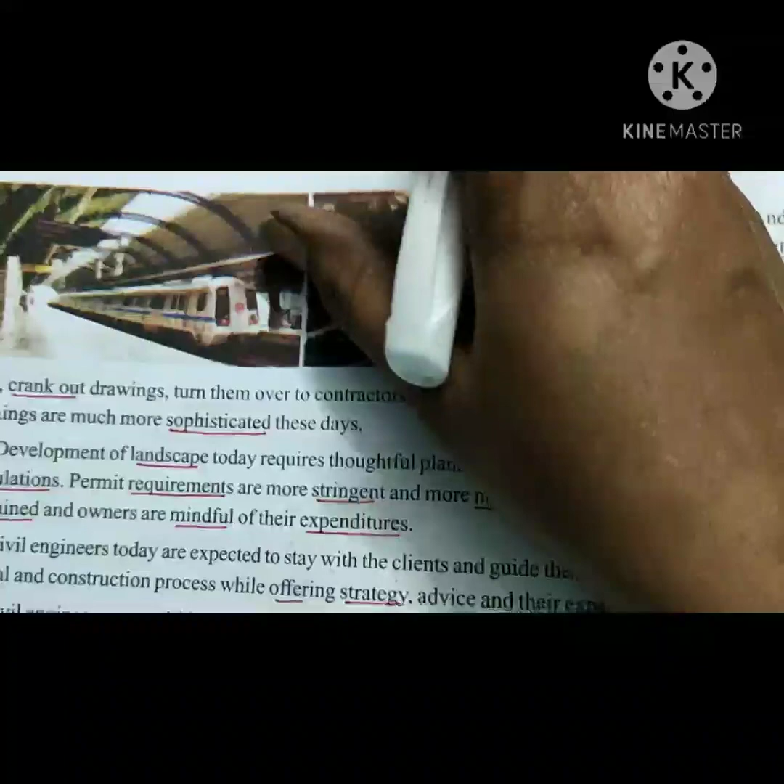The role of civil engineering has been continuously changing. Earlier, engineers would focus their efforts on production of site plans, crank out drawings, turn them over to contractors and pretty much be done with it. But things are much more sophisticated these days.

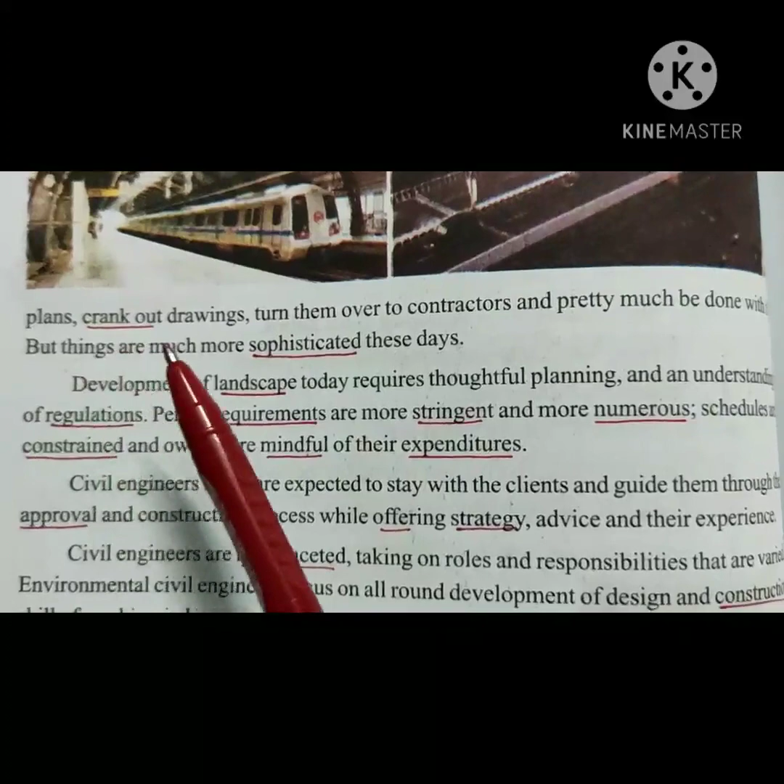In previous days, civil engineers used to draw the plans, crank out - meaning produce a lot of low quality things quickly - drawings, and turn them over to contractors, pretty much being done with it. But things are much more sophisticated these days. Meaning of sophisticated: advanced and complicated in the way they work.

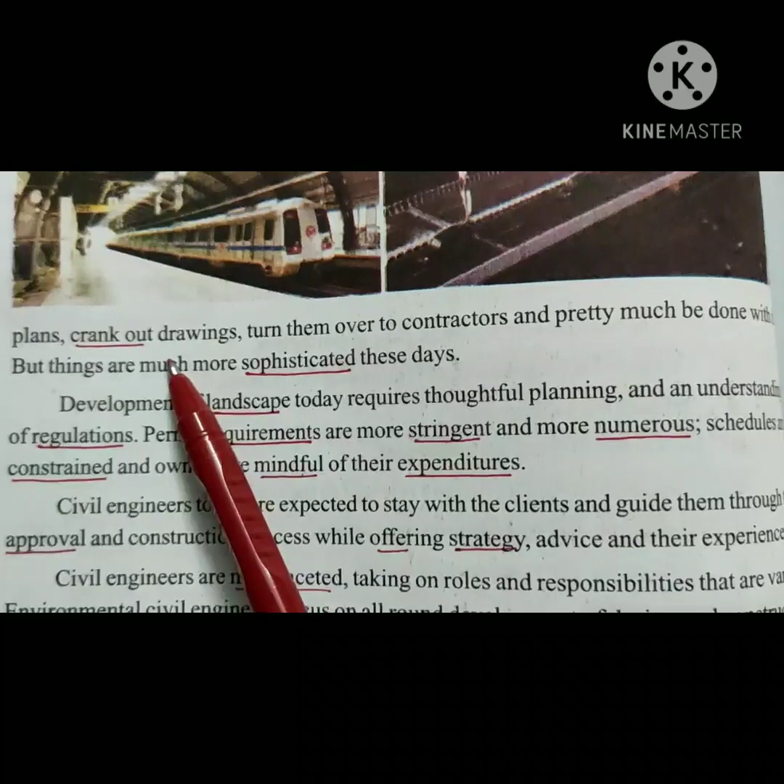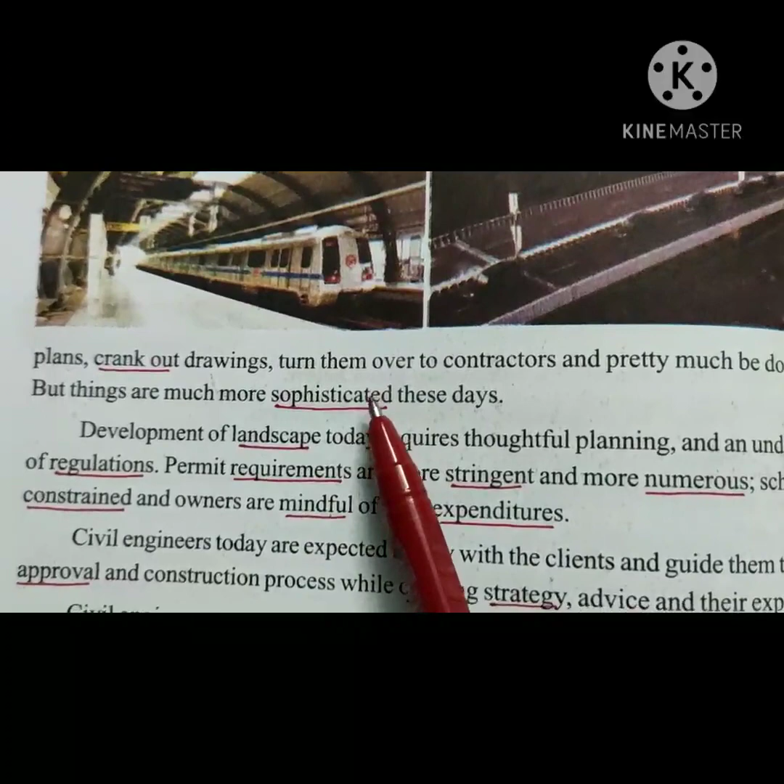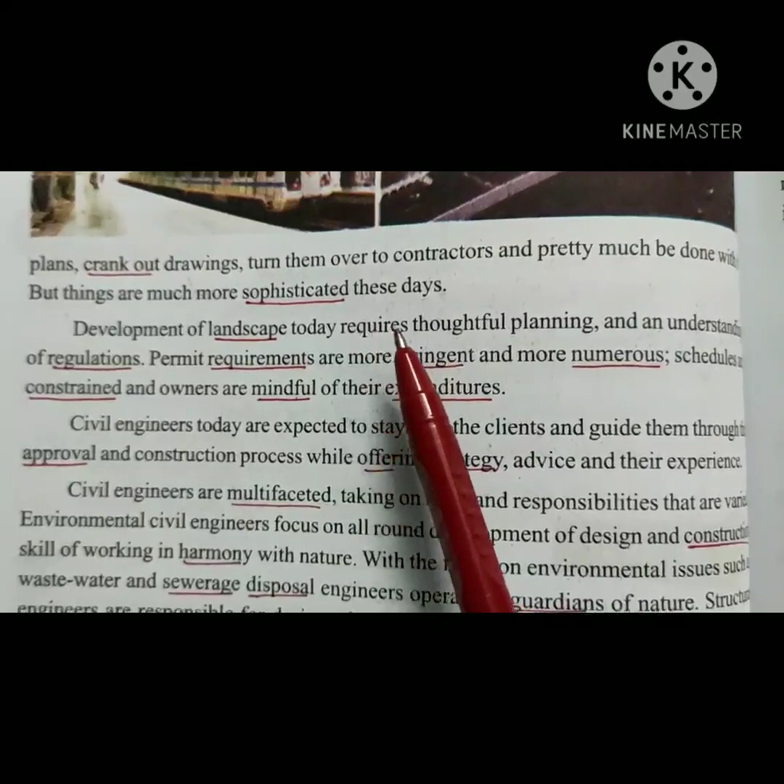Previously they used to draw the plans, give them to the contractors, and get materials from outside - many such plans used to take place. But now, much more sophisticated, advanced technology is used to complete their work very easily these days. Development of landscape today requires thoughtful planning and an understanding of regulations.

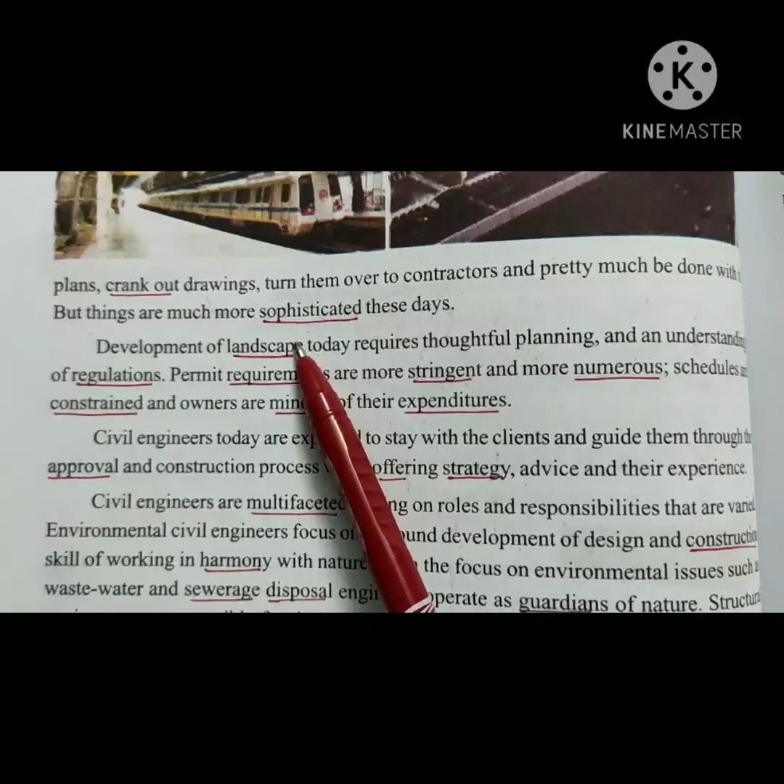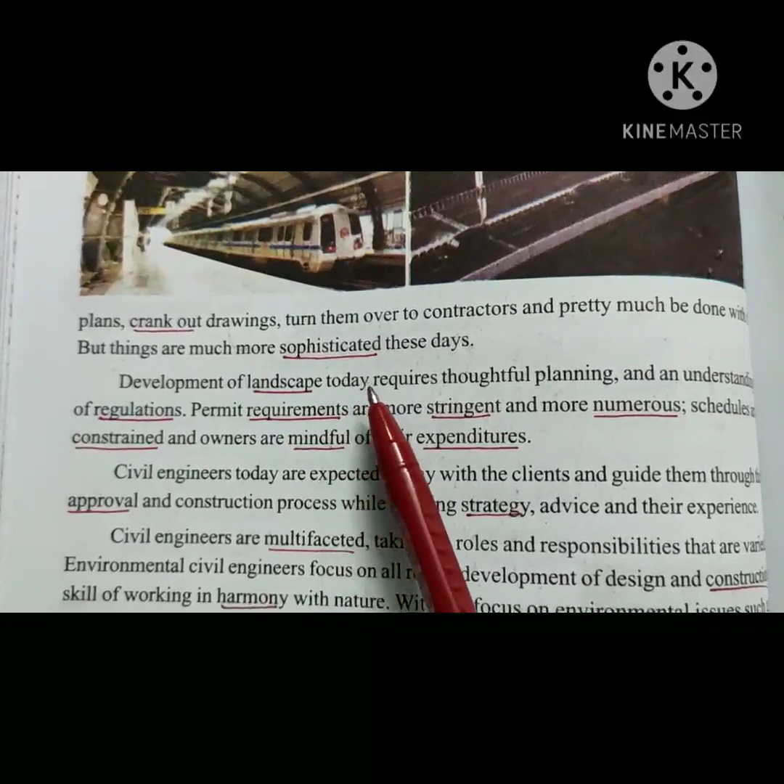Meaning of landscape: everything you can see in an area when you look at it - the whole picture of whatever construction is needed there. The development of landscape today requires thoughtful planning and an understanding of regulations, meaning rules and regulations should be maintained properly, along with thoughtful planning and understanding.

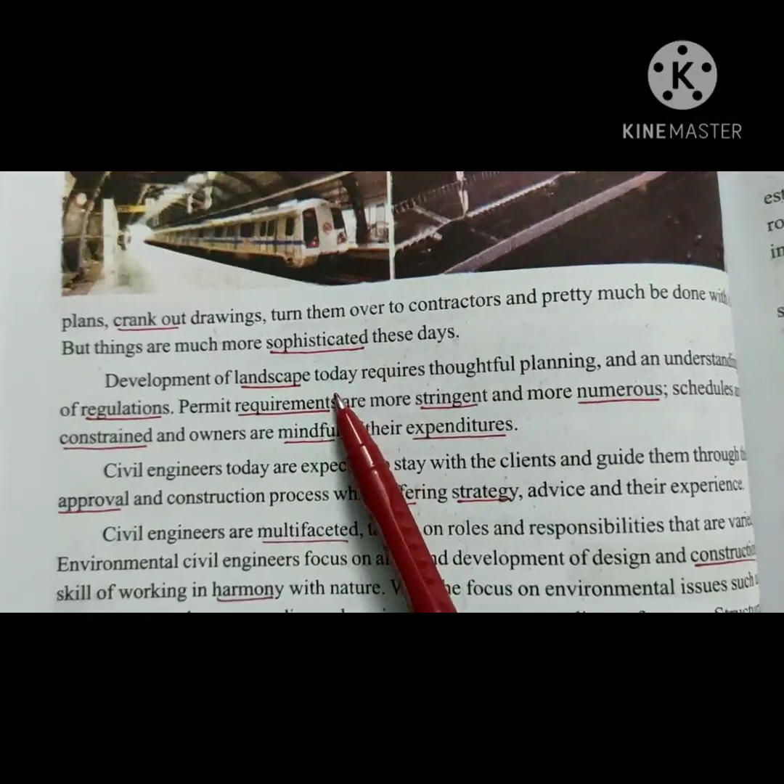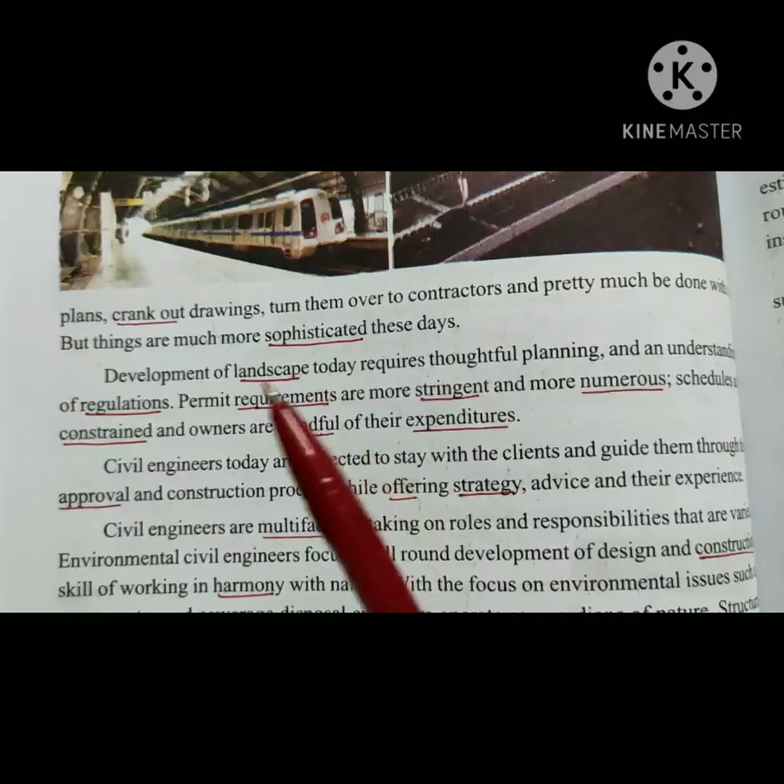Permit requirements are more stringent and more numerous. Schedules are constrained and owners are mindful of their expenditures. Meaning of requirements: needs; stringent: strict; numerous: many. So here, permit needs are very strictly maintained.

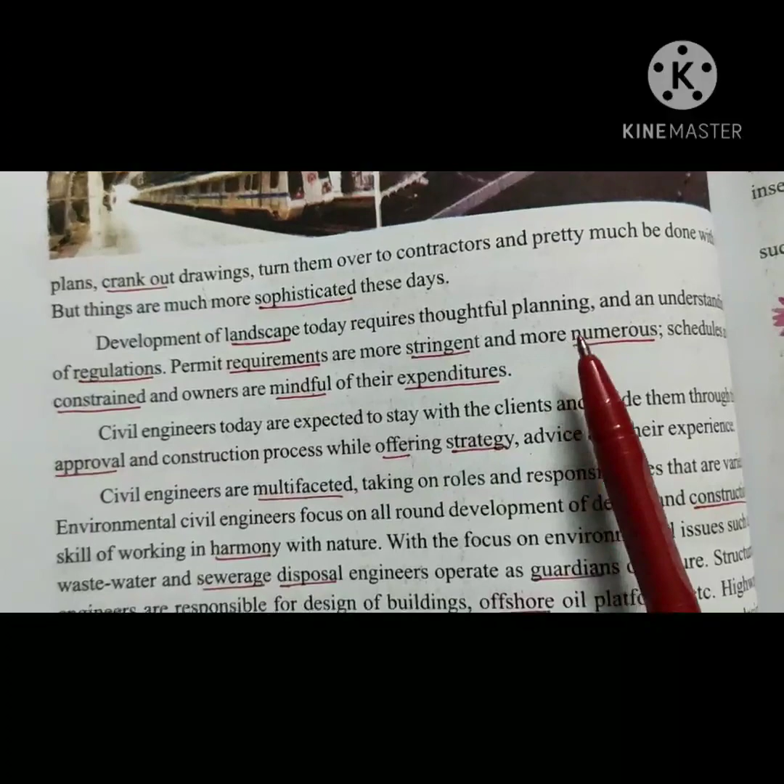Schedules are constrained, meaning a thing that limits something - there should be a limit. Owners are mindful, meaning aware of, their expenditures, meaning expenses about money. The owners are very aware of the expenditures because day by day expenditures are increasing a lot. So permit needs are strict, many rules must be maintained, and owners are also aware of each and every expenditure.

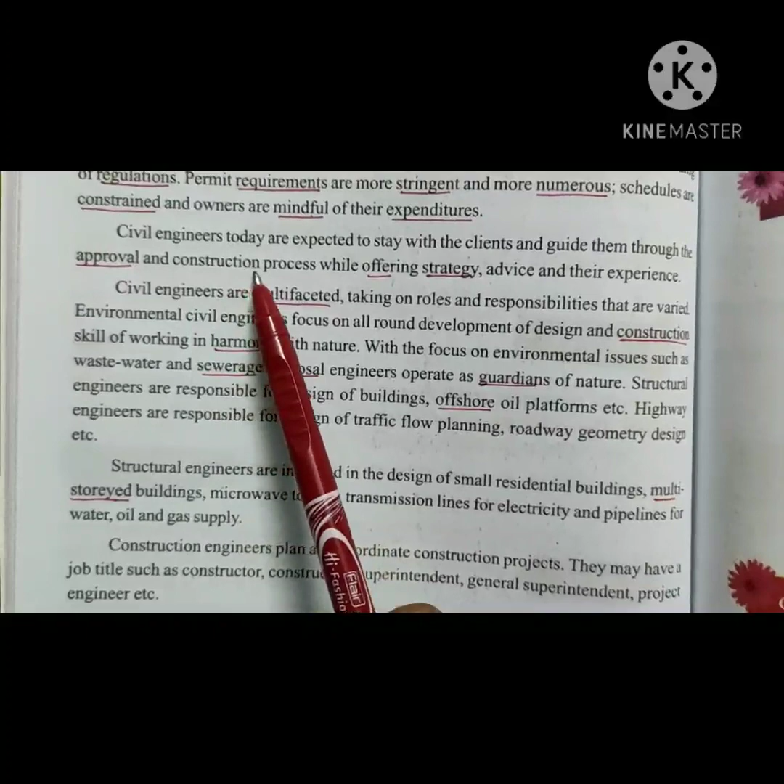Civil engineers today are expected to stay with the clients and guide them through the approval and construction process while offering strategy, advice, and their experience.

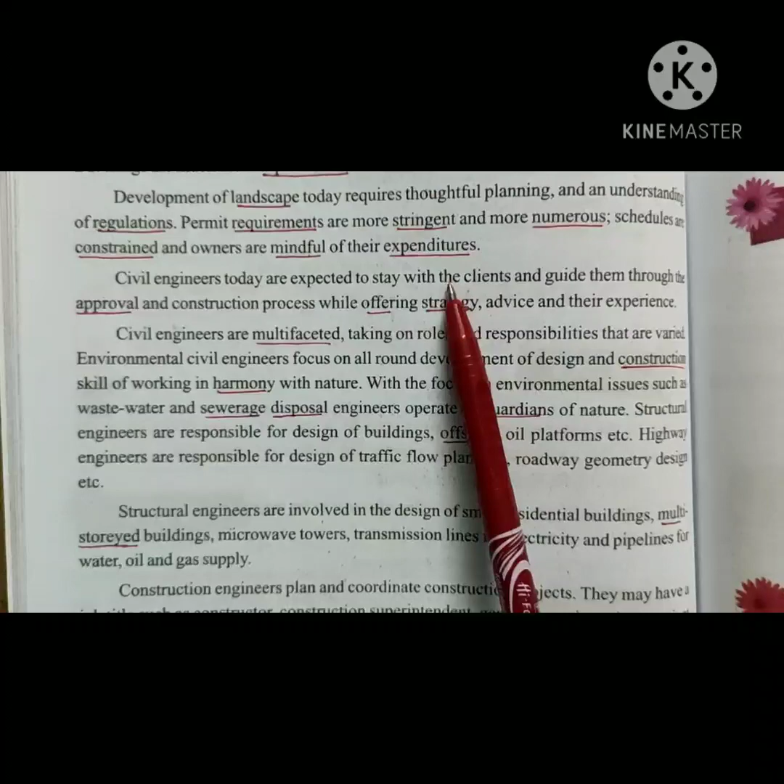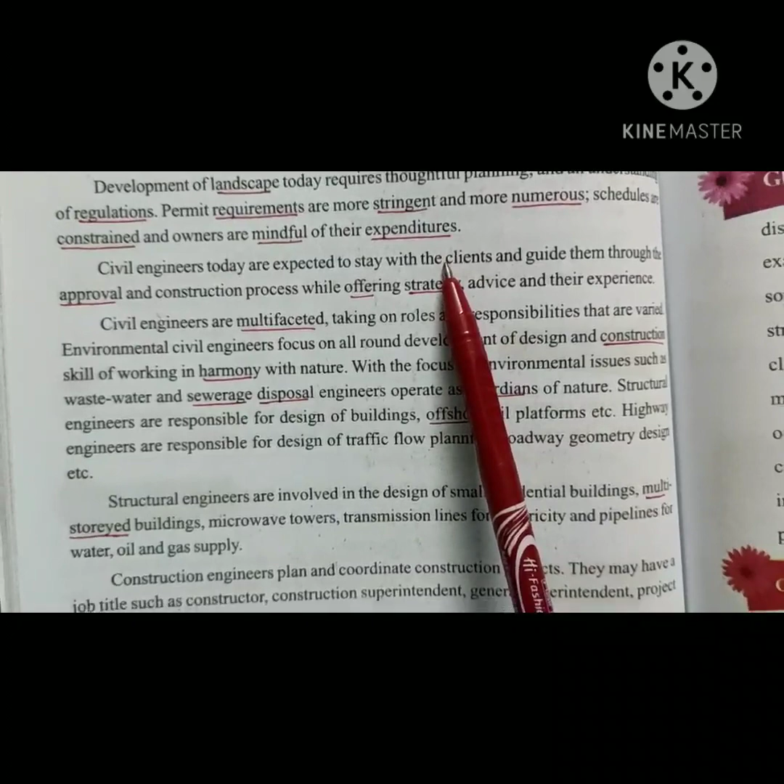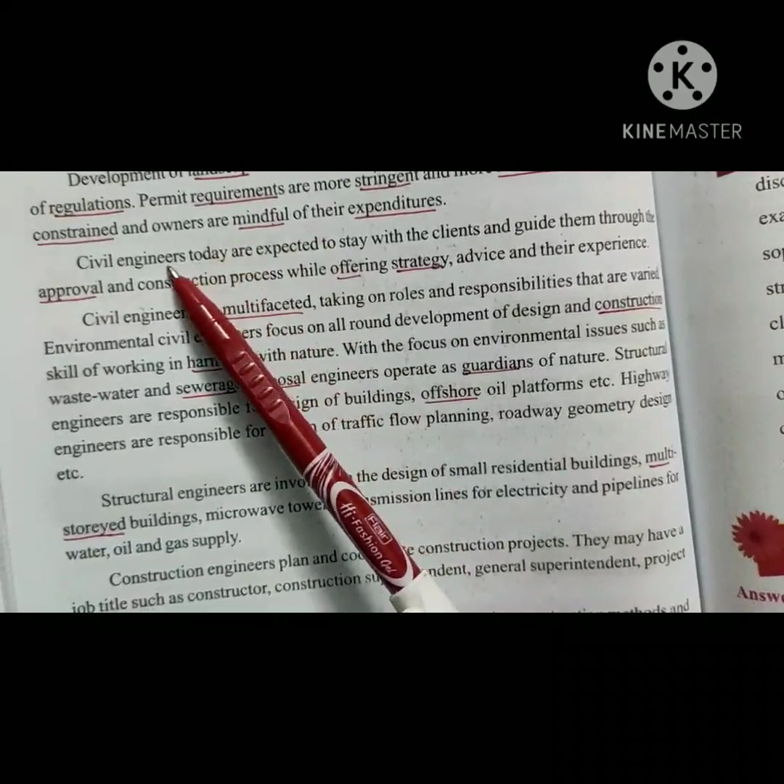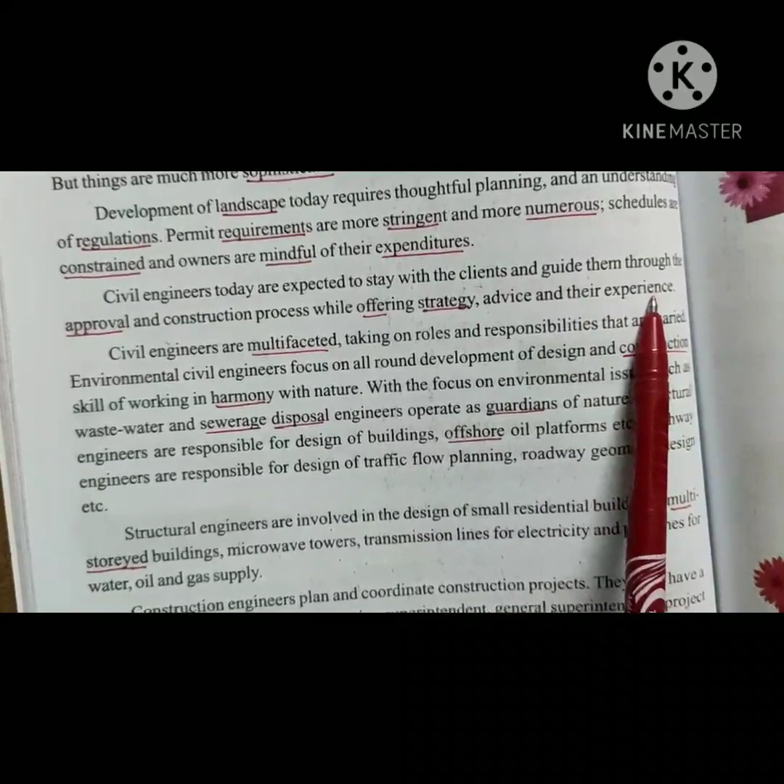Clients means those who ever need the help of civil engineers. They approach civil engineers when they want to know about building a house, and they would like to be guided with approval, meaning permission. They want to take permission, know about the construction process, and get help from civil engineering strategy, meaning technique. So the clients need the help and advice with the civil engineer's experience to guide them throughout the construction process. They would like to take permission and ask the civil engineers to help them.

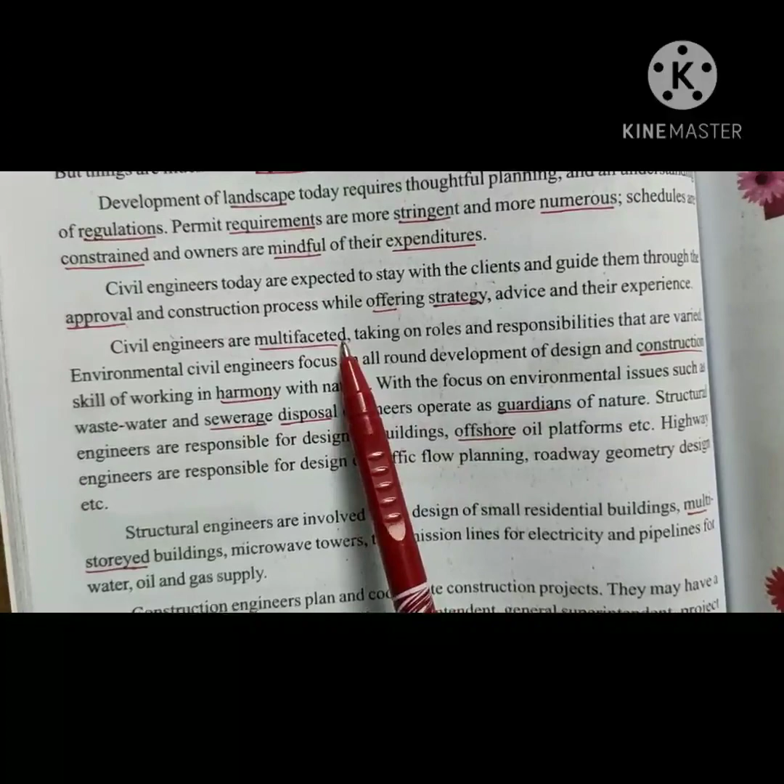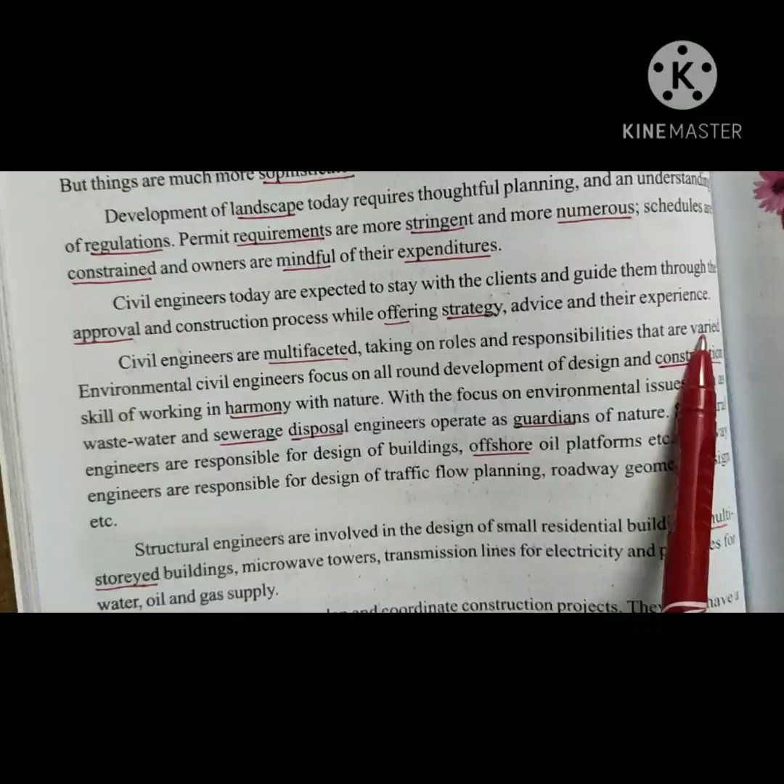Civil engineers are multifaceted, taking on roles and responsibilities that are varied. Multifaceted means having many phases or branches. Civil engineering consists of so many branches, and each branch has its own role and responsibility.

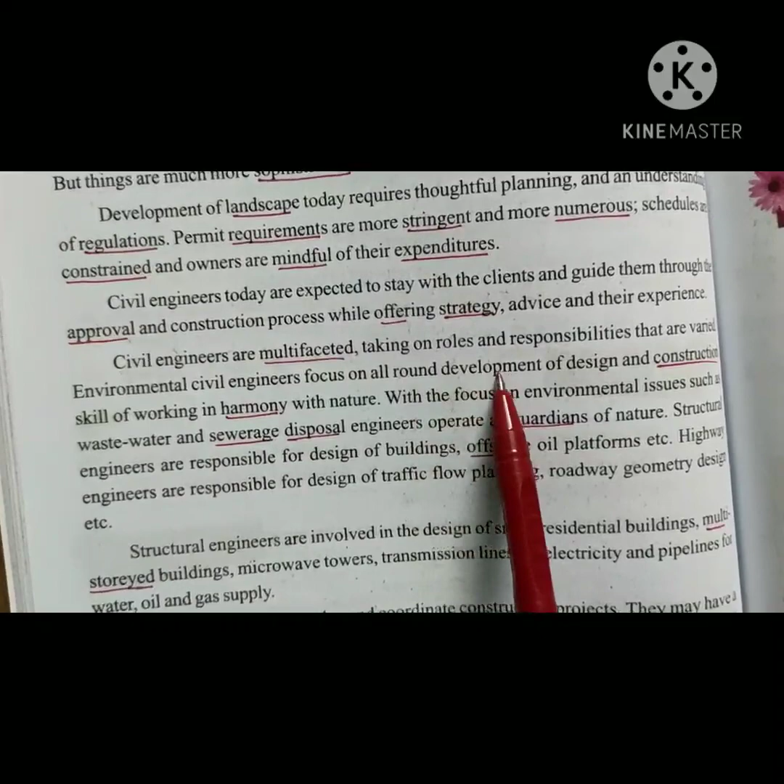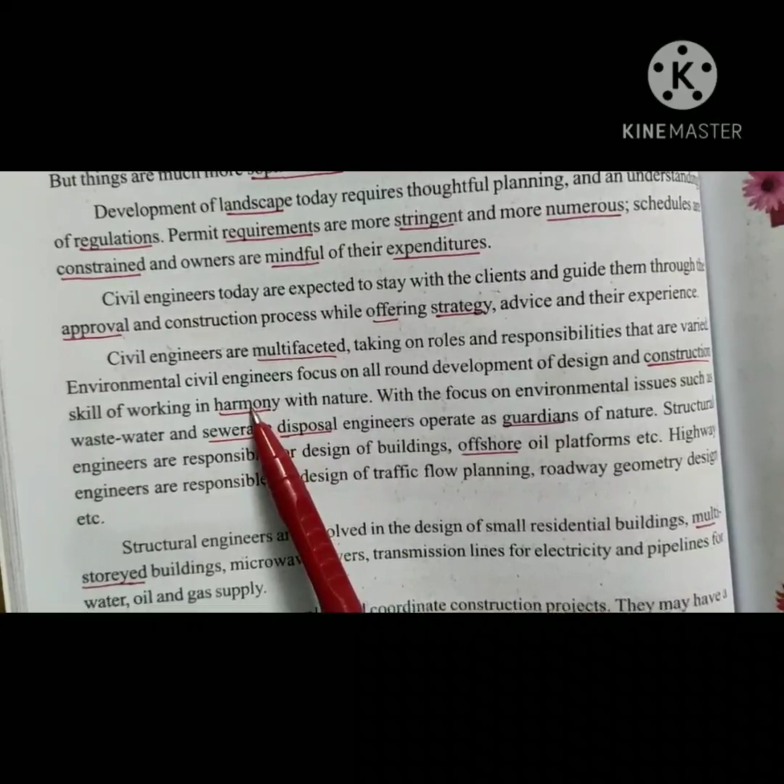Environmental civil engineers focus on all-round development of design and construction, the skill of working in harmony with nature. This is one branch of civil engineering. They focus on all-round design and construction, balancing with nature, meaning all their construction and building work is done in harmony, in balance with nature.

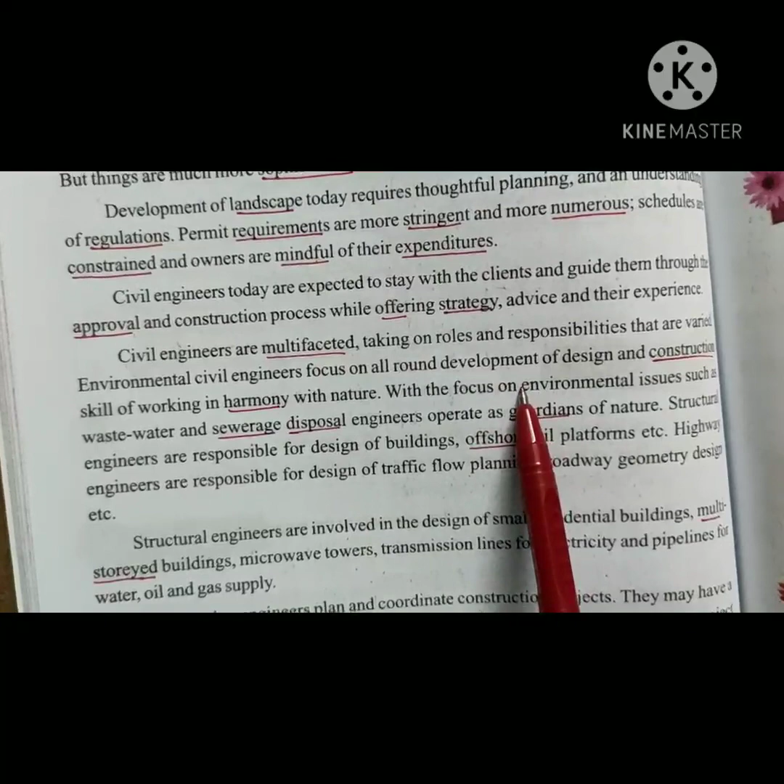With the focus on environmental issues such as wastewater and sewerage disposal, engineers operate as guardians of nature. Sewerage means the system that carries the wastage produced by human beings, and disposal means to throw away. The engineers dispose of this waste and operate as guardians of nature.

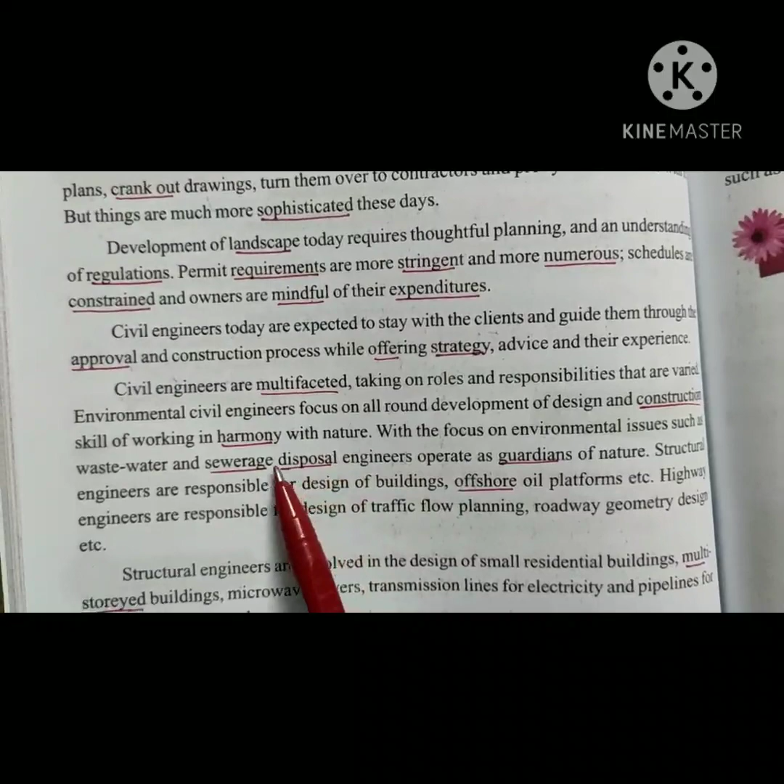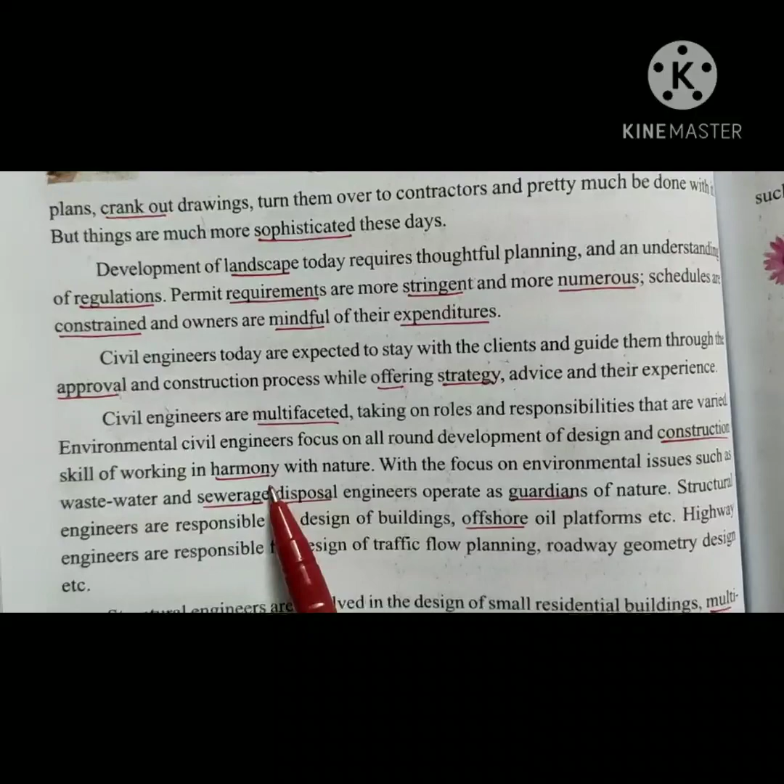Environmental engineers are called the guardians of nature. Who are the guardians? The waste material which is thrown by us, they dispose of it, meaning they throw it away. They are the guardians of our nature. Why are they called guardians of our nature, children? Because they guard our nature - whatever wastage we throw out, they throw away from us and protect the nature.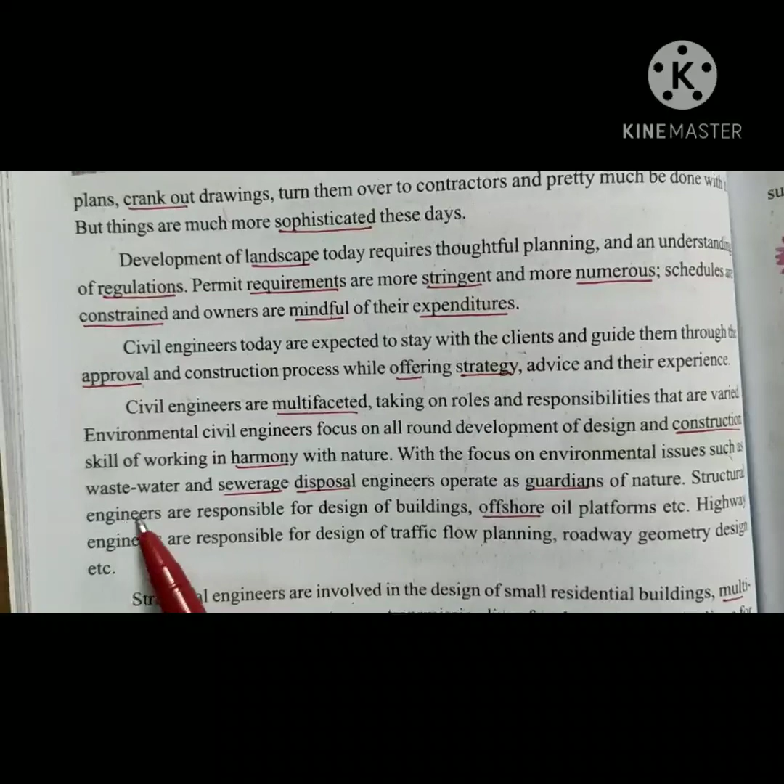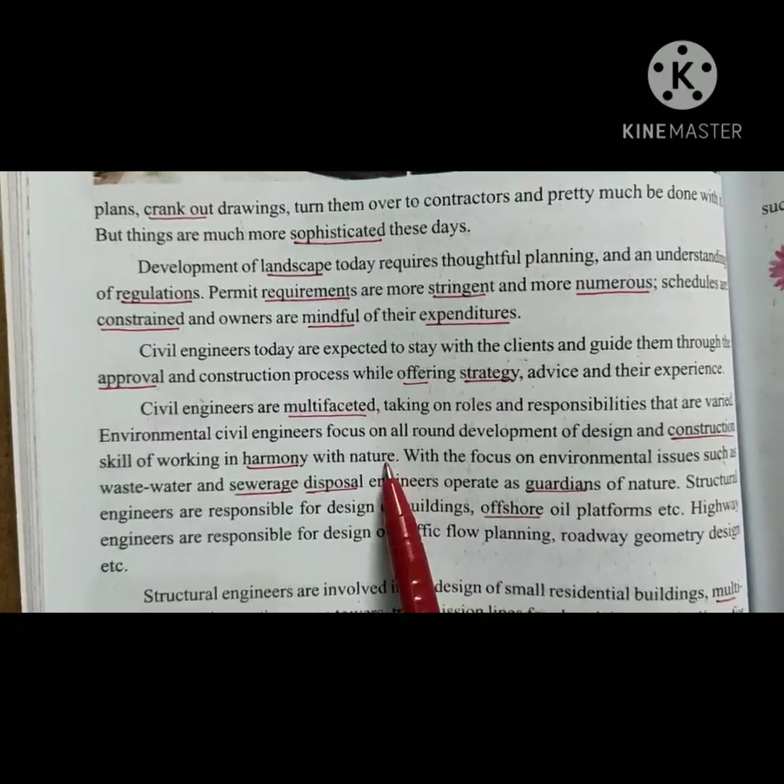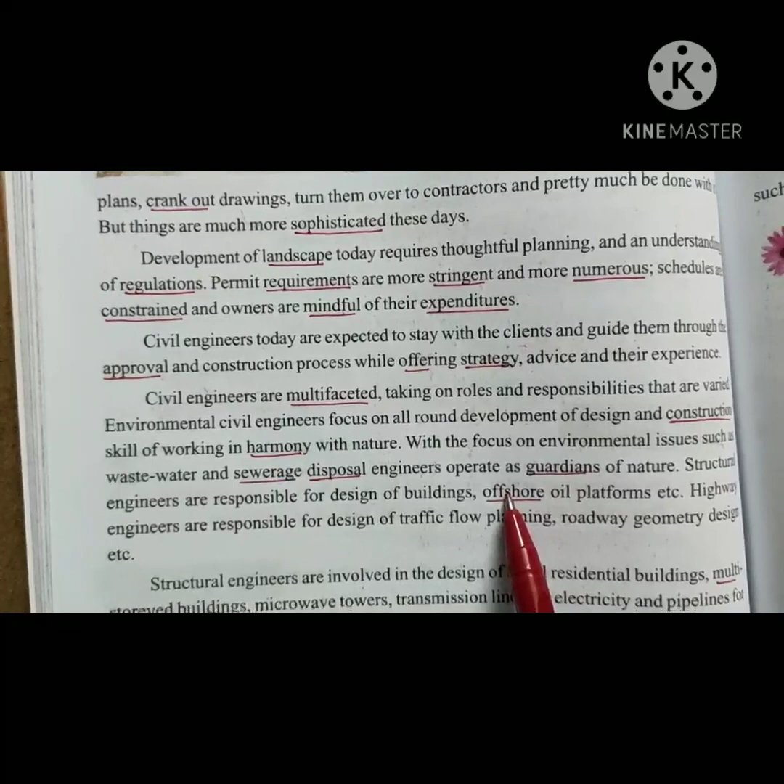Structural engineers are responsible for design of buildings, offshore oil platforms, etc. In civil engineering, one branch is environmental civil engineers who focus on harmony with nature and guard it. Coming to structural engineers, they are responsible for design of buildings, offshore meaning at a distance from the seashore, oil platforms, etc. They handle construction near the offshore area.

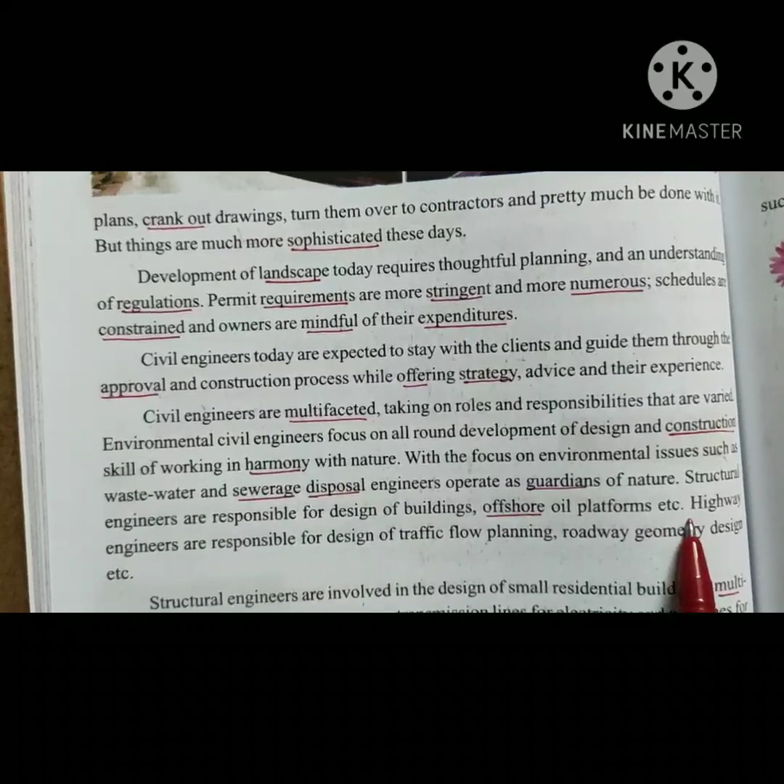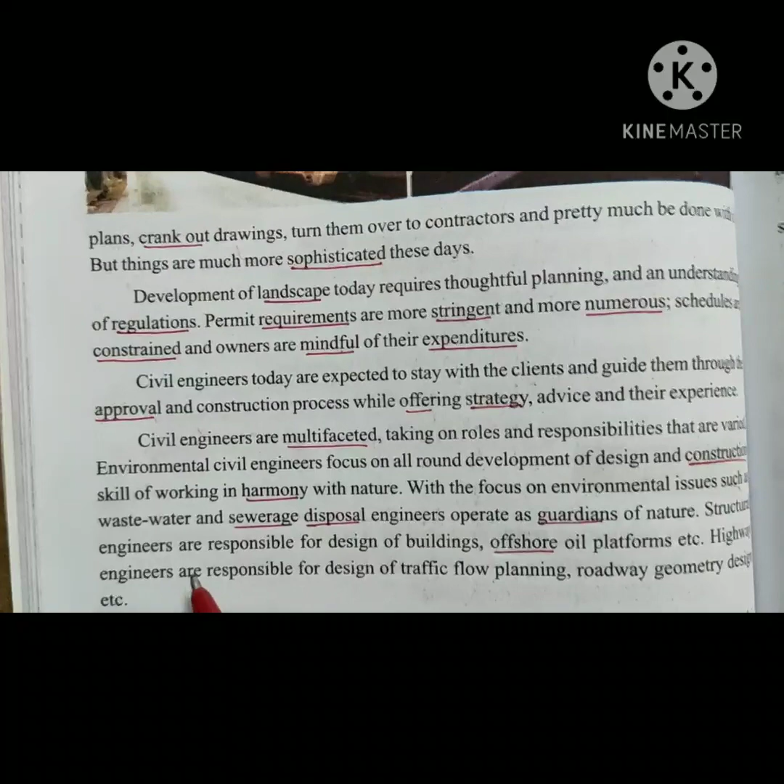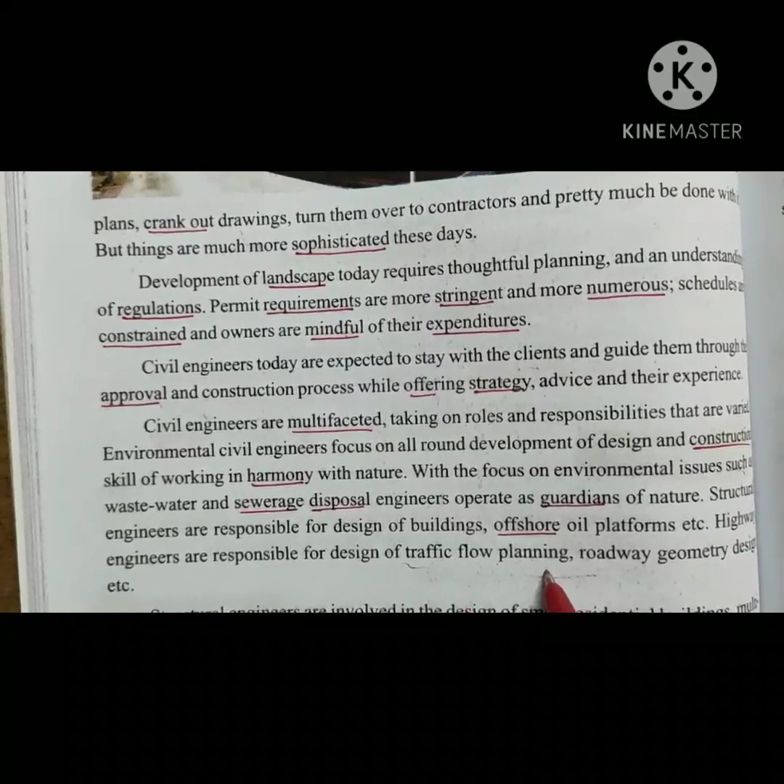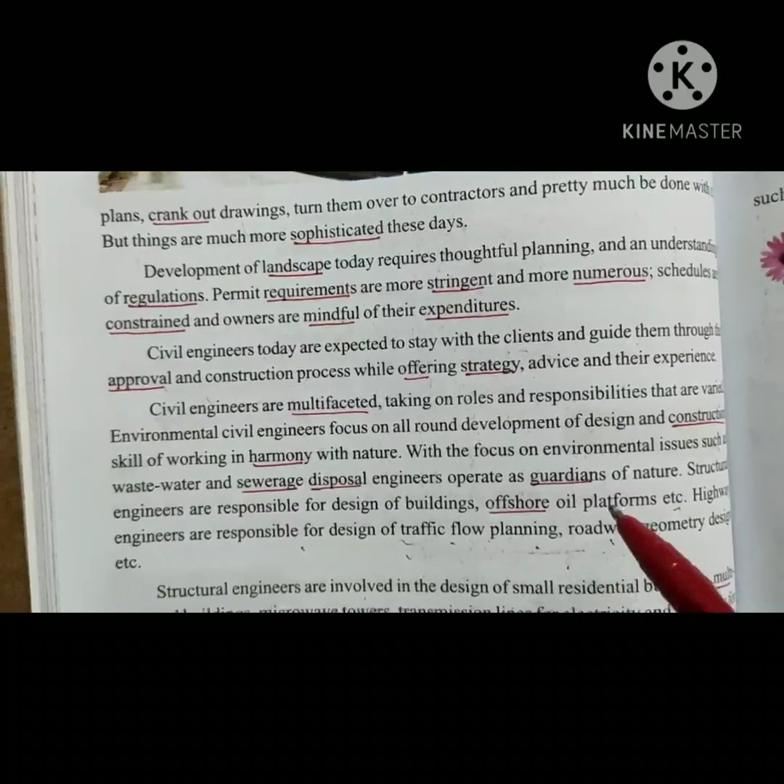Highway engineers are responsible for design of traffic flow planning, roadway geometry designs, etc. They are responsible for the design of traffic flow planning - you can see how traffic flows smoothly on the roads because highway engineers are fully responsible for this. According to the design of traffic, we are able to go easily and safely on the roads. So they are the engineers for traffic flow planning, roadway geometric designs, etc.

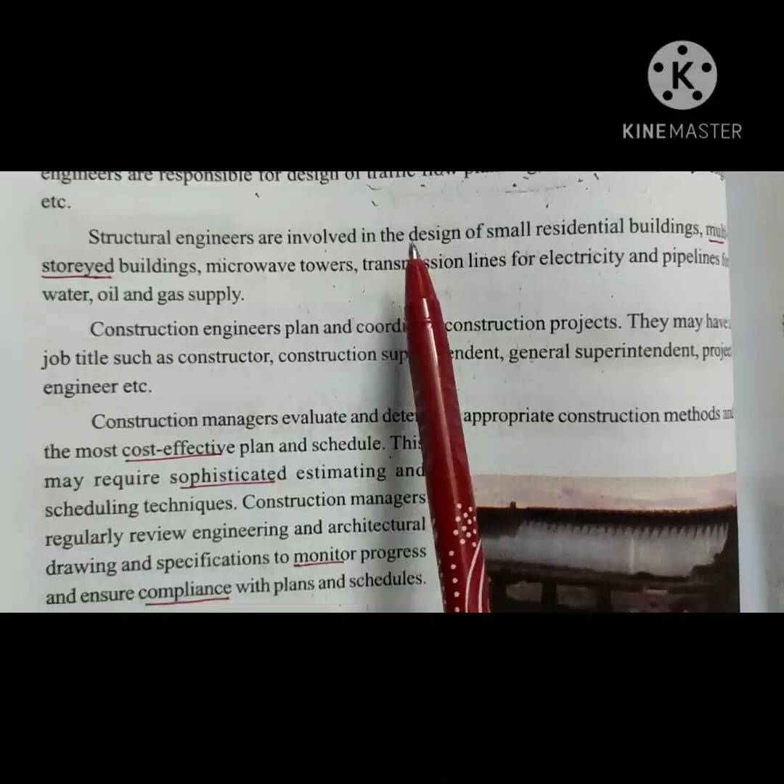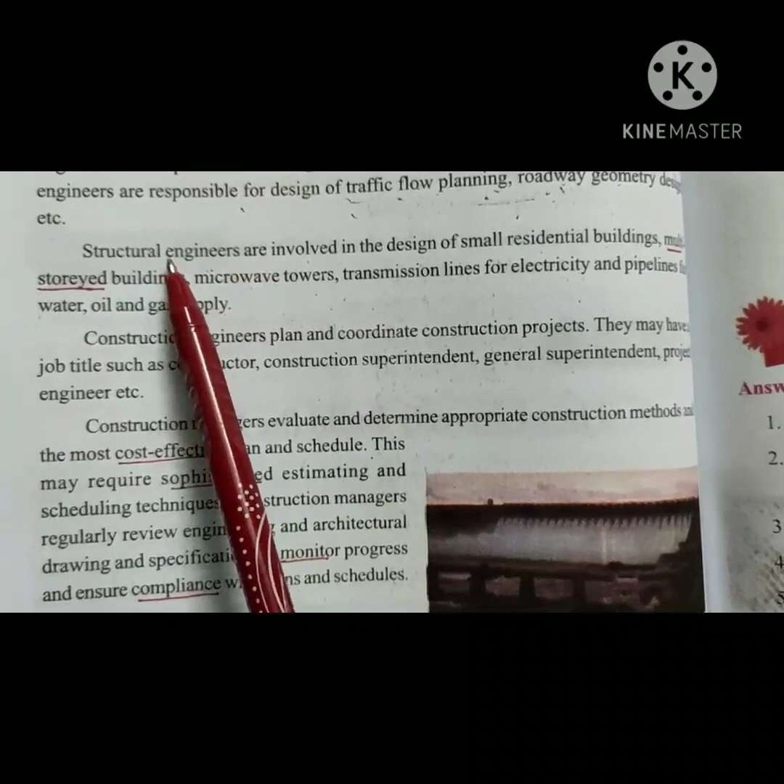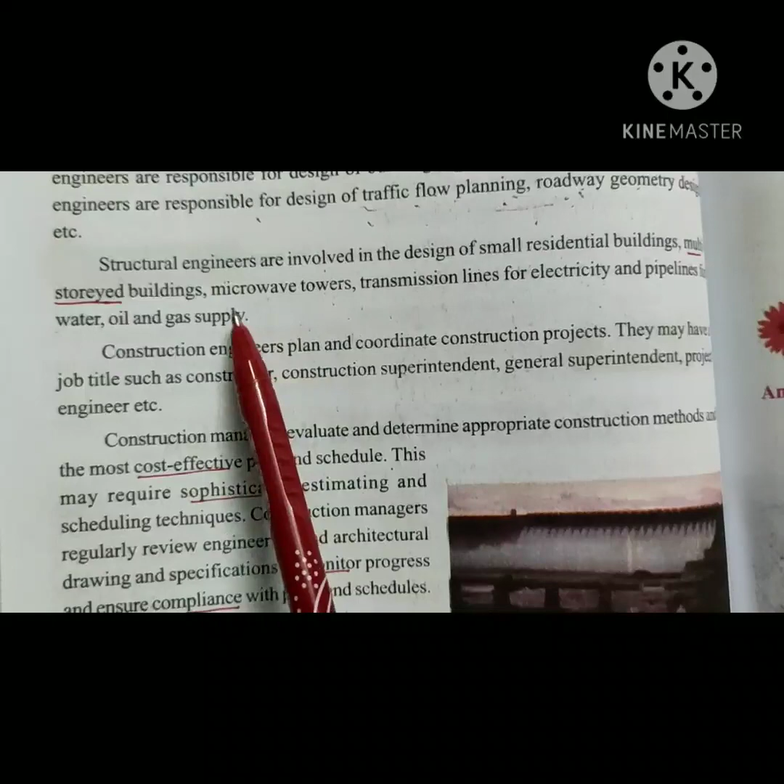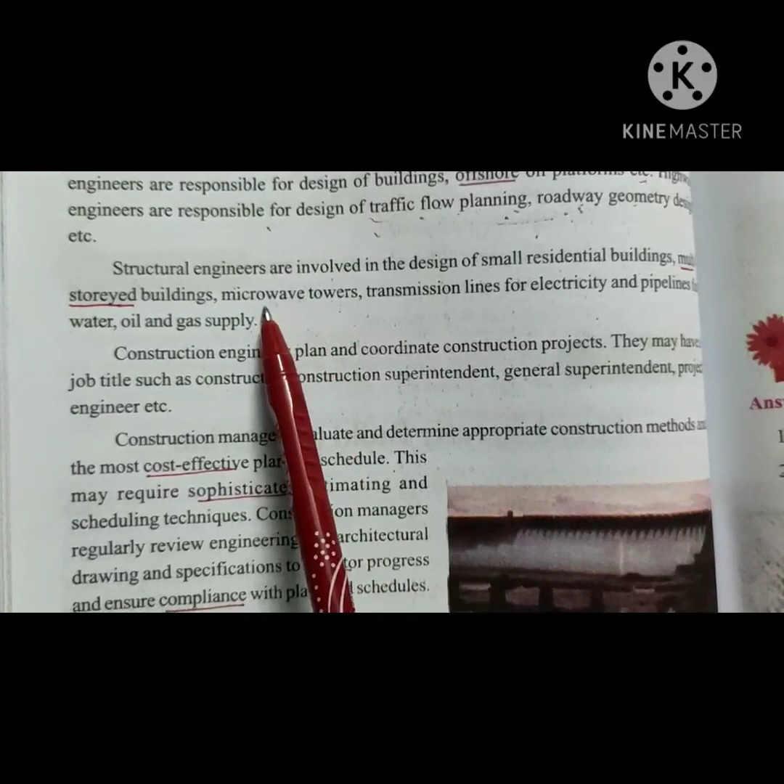Structural engineers are involved in the design of small residential buildings, multi-storeyed buildings, microwave towers, transmission lines for electricity, and pipelines for water, oil and gas supply. Residential means small buildings, and multi-storied means having many floors - you can see many floor buildings. These engineers take the major role for constructing multi-storied buildings, building microwave towers, transmission lines for electricity, and pipelines for water, oil and gas supply.

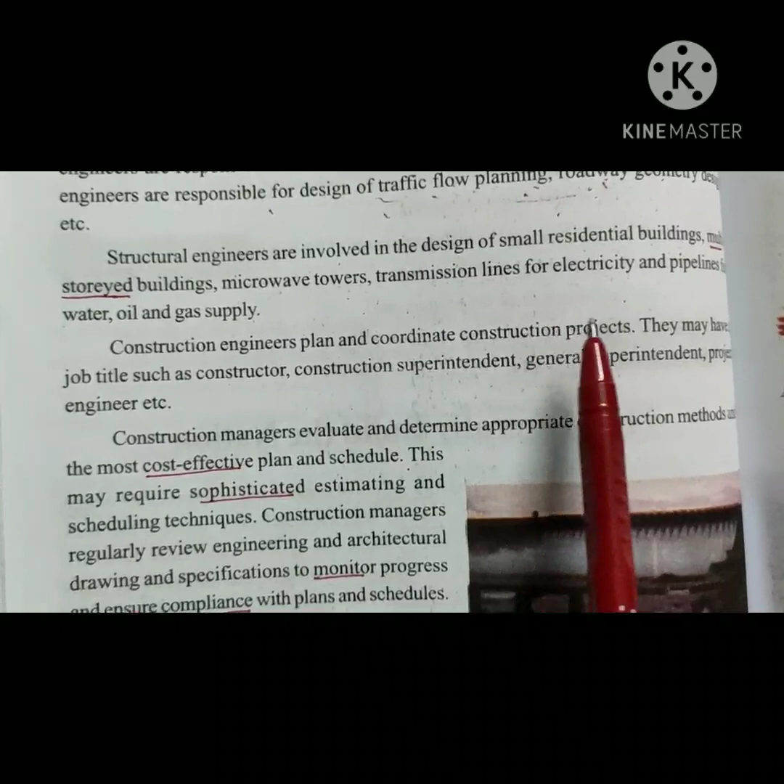Coming to construction engineers, they plan and coordinate construction projects. You can see the example of a dam here.

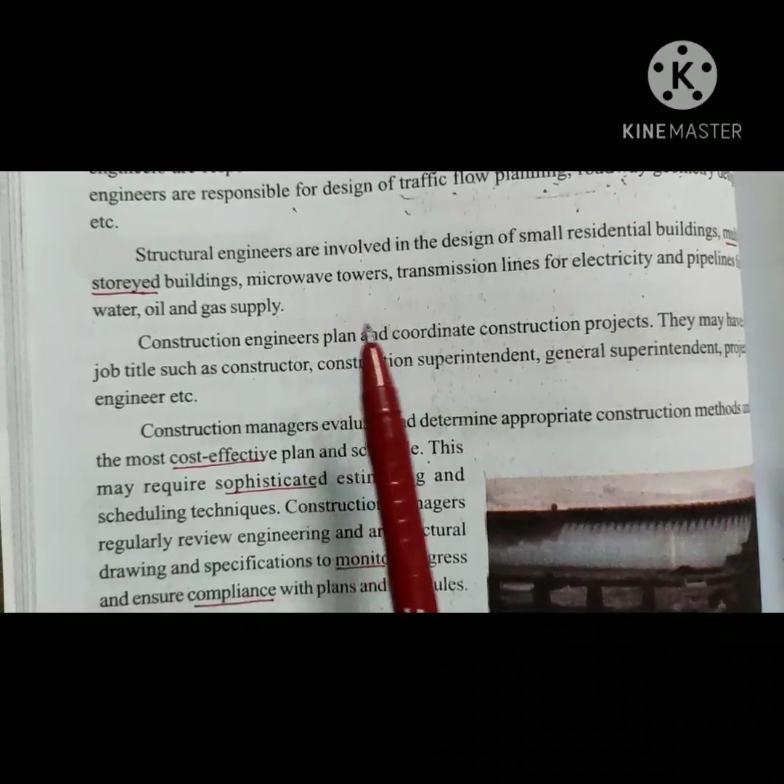Construction engineers plan. They may have job titles such as constructor, construction superintendent, general superintendent, project engineer, etc.

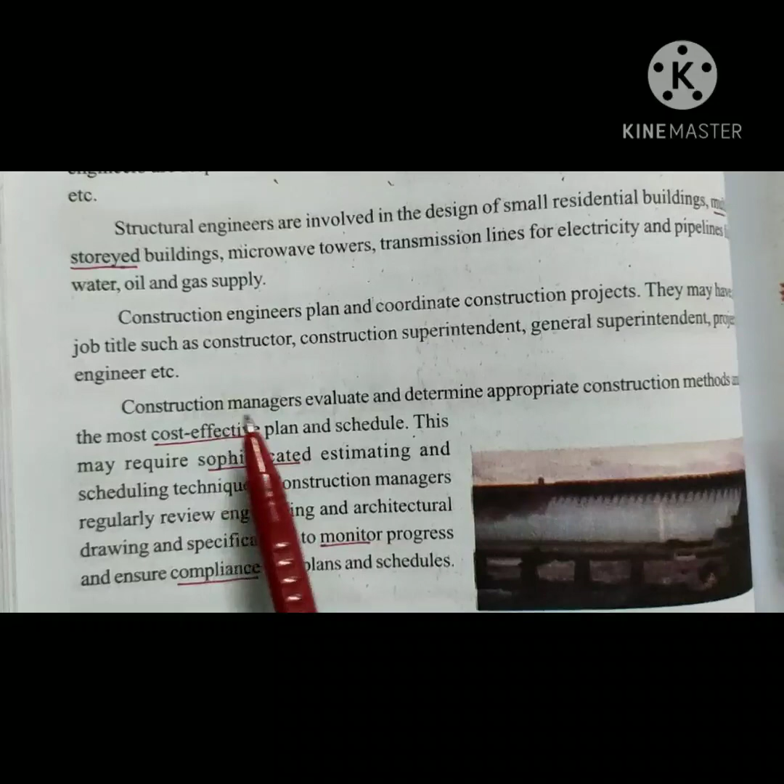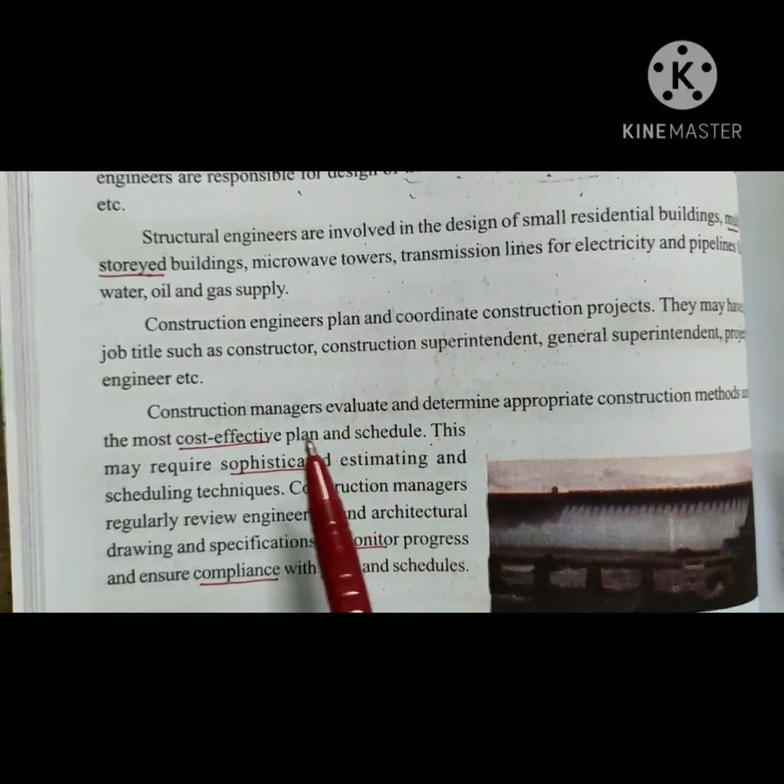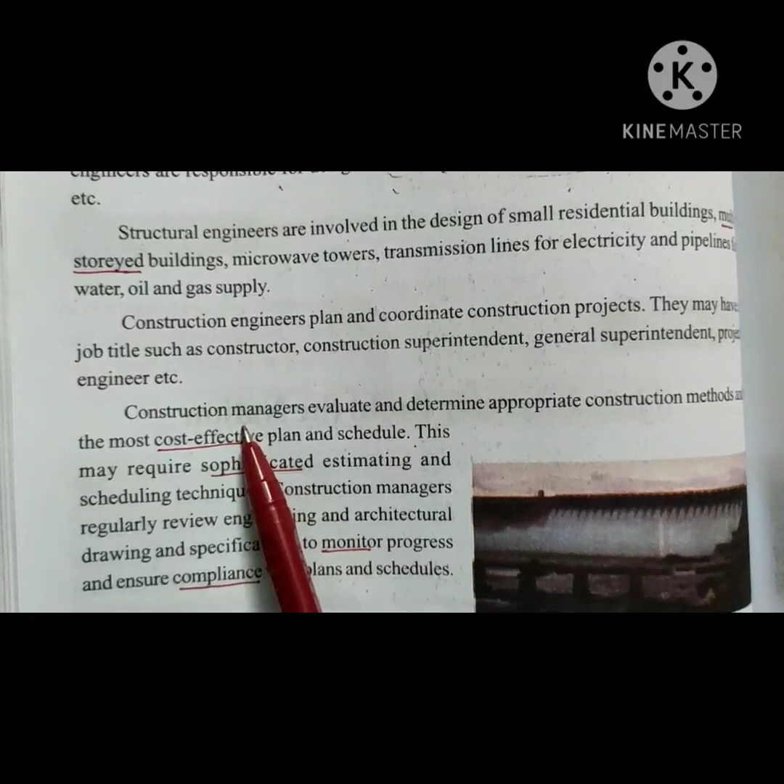Construction managers evaluate and determine appropriate construction methods and the most cost-effective plan and schedule. Cost-effective means giving the best possible profit, and they plan and schedule accordingly.

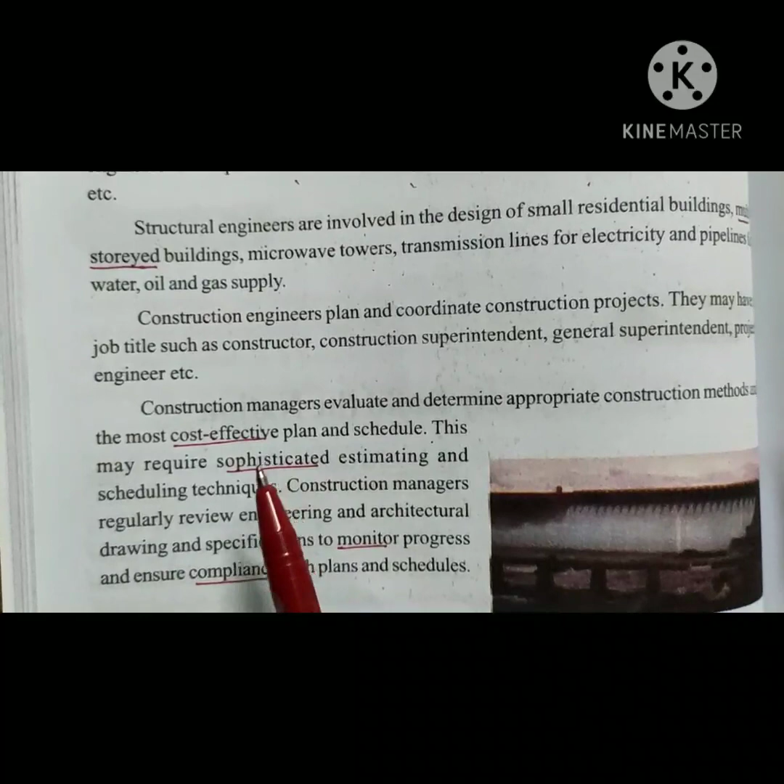They may require sophisticated estimating and scheduling techniques, meaning they use advanced technology now and then to give the plan for the profit.

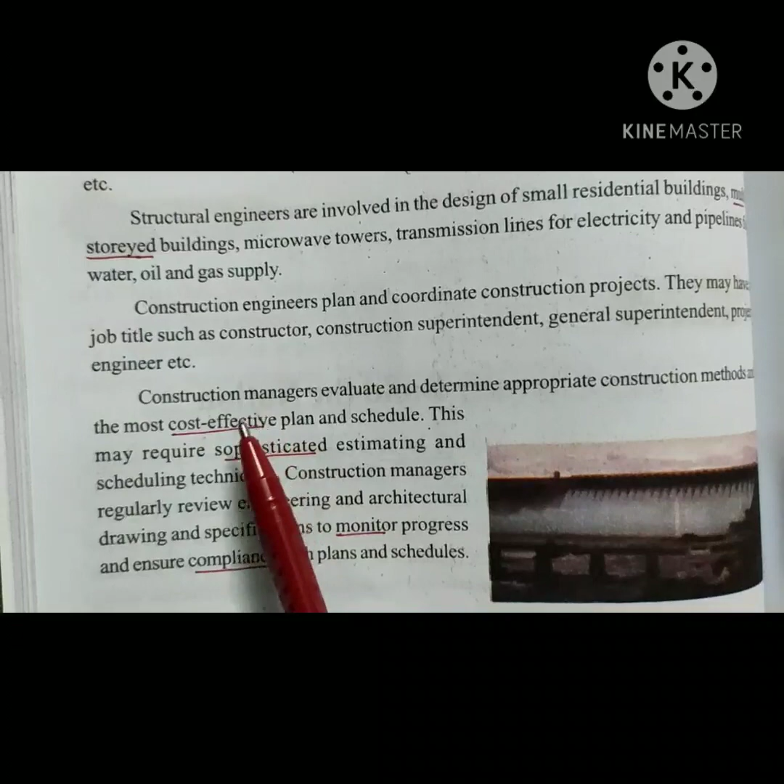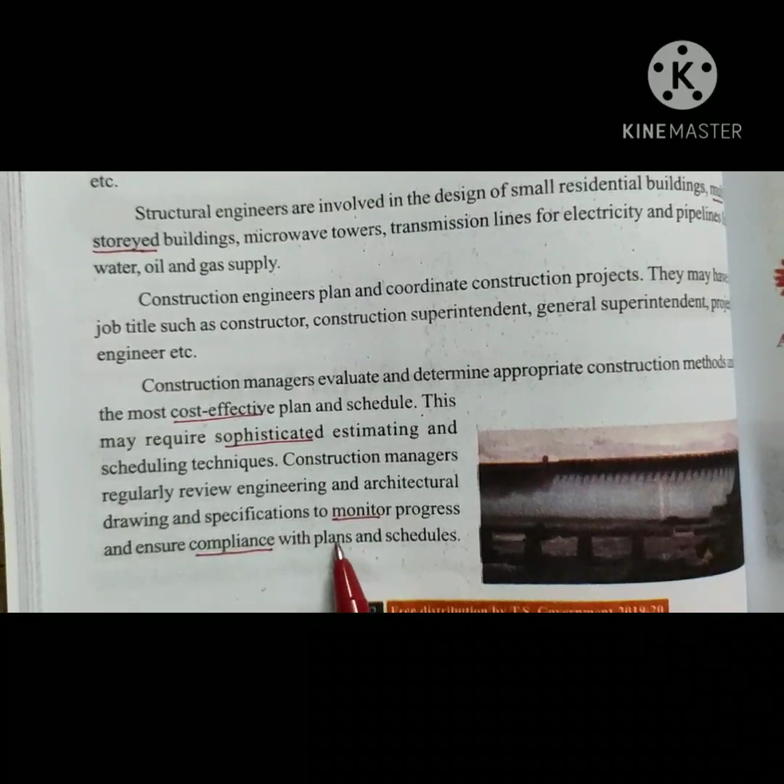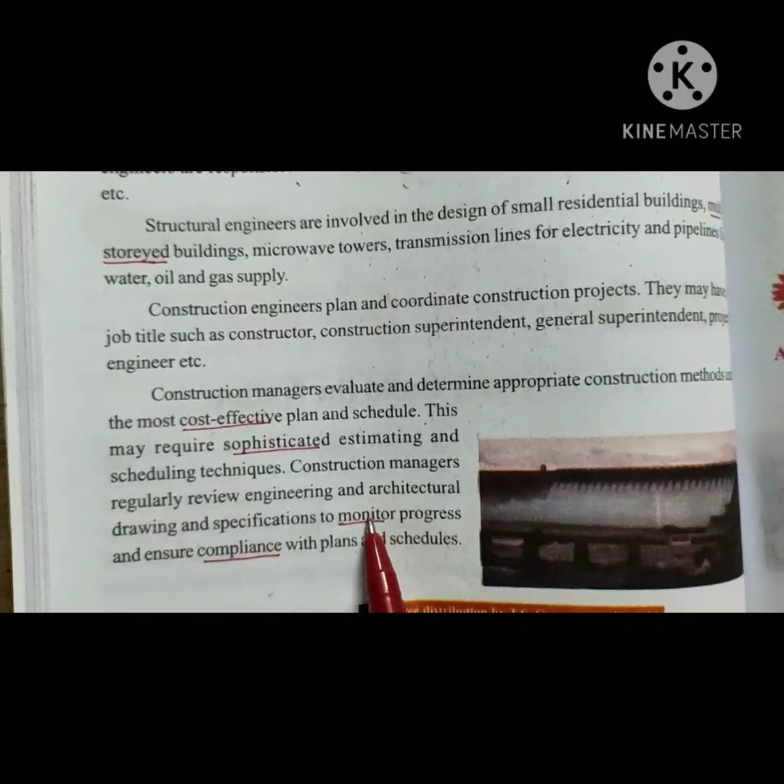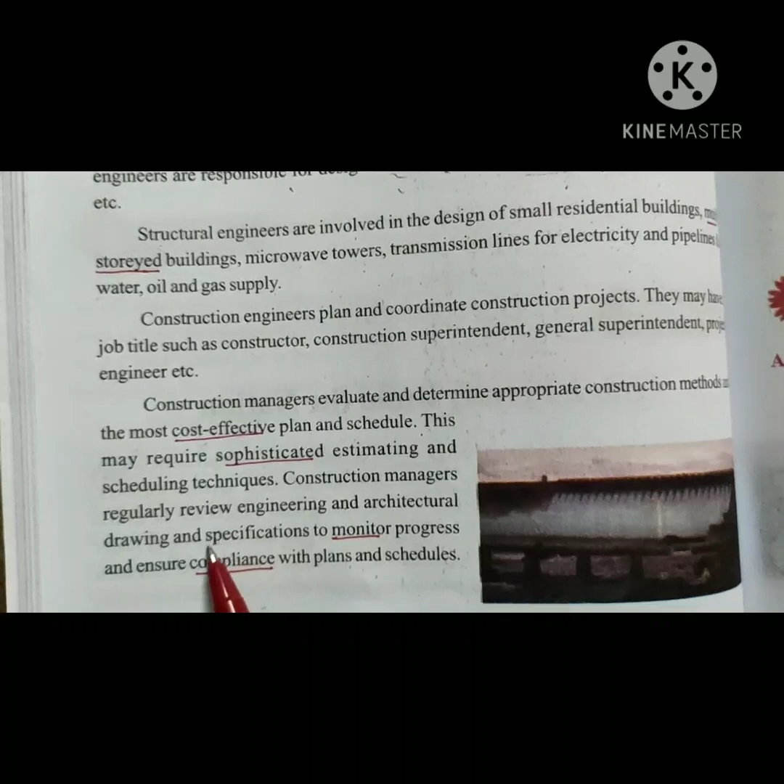Construction managers regularly review engineering and architectural drawings and specifications to monitor, meaning control, progress and ensure compliance, meaning conformity in fulfilling official requirements with the plans and schedules. They take over the major role.

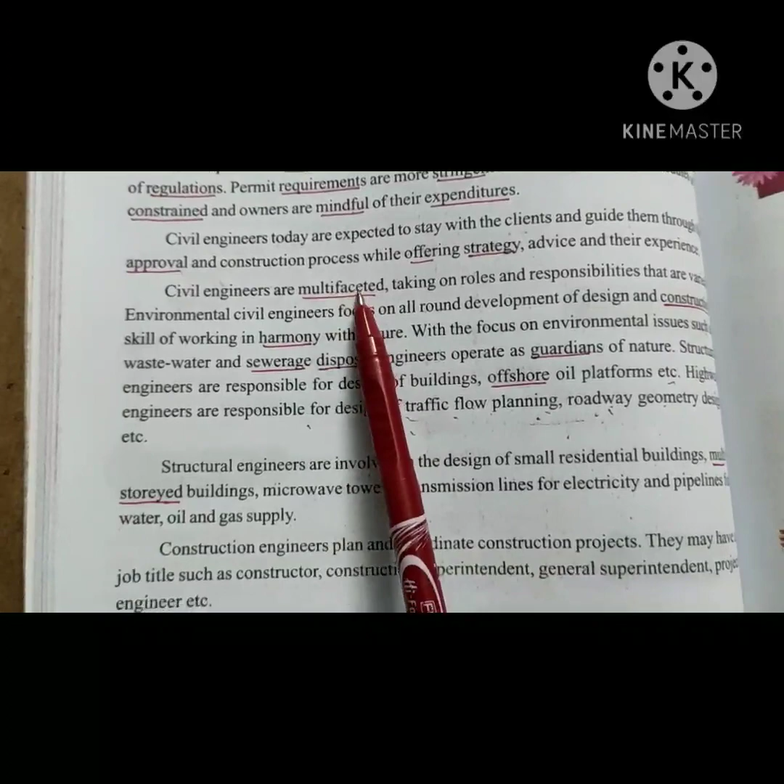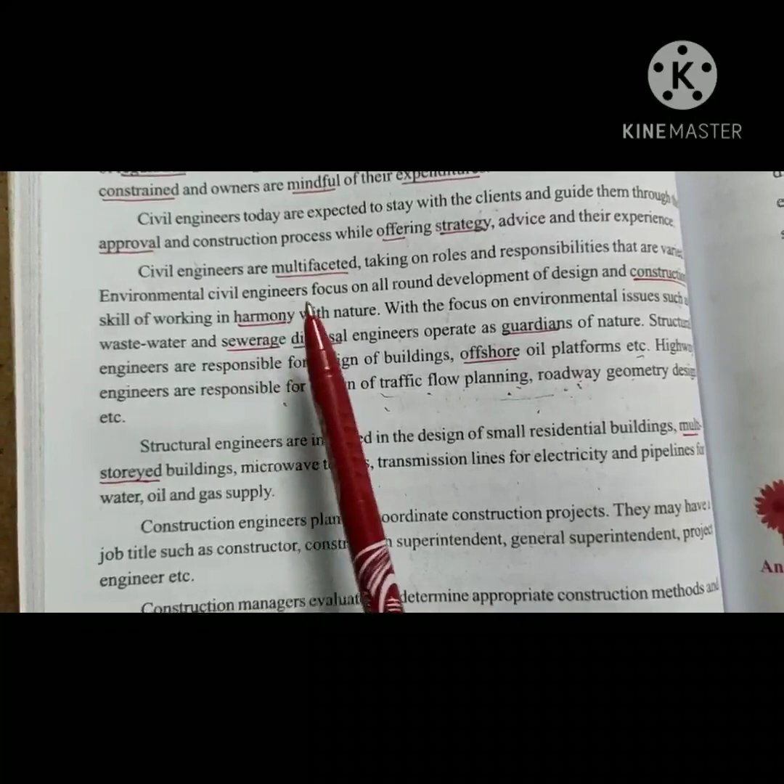In civil engineering we have a few branches. The first branch is environmental civil engineering. They focus on environmental issues and take the development of design and construction in harmony with nature, guarding nature.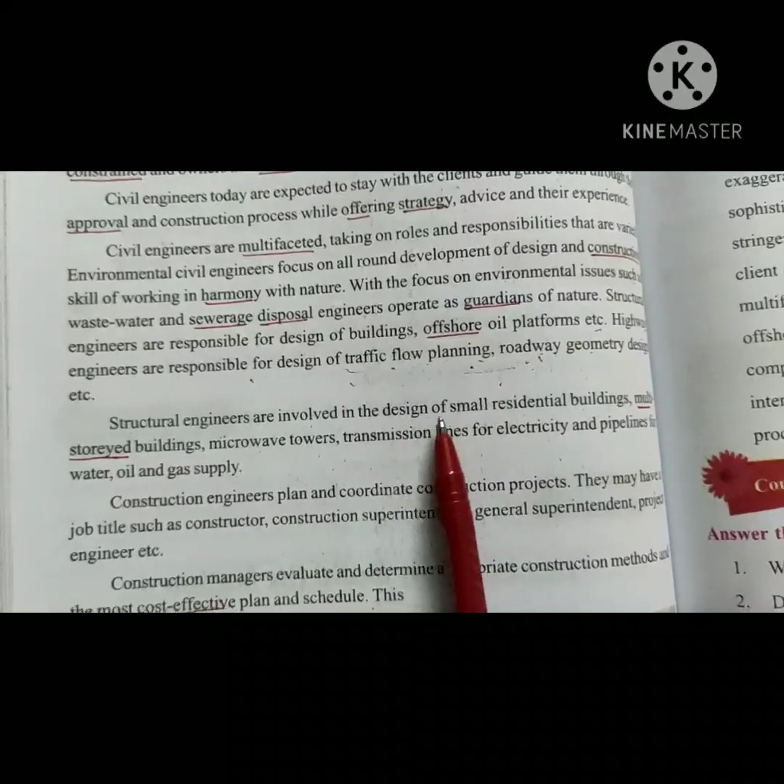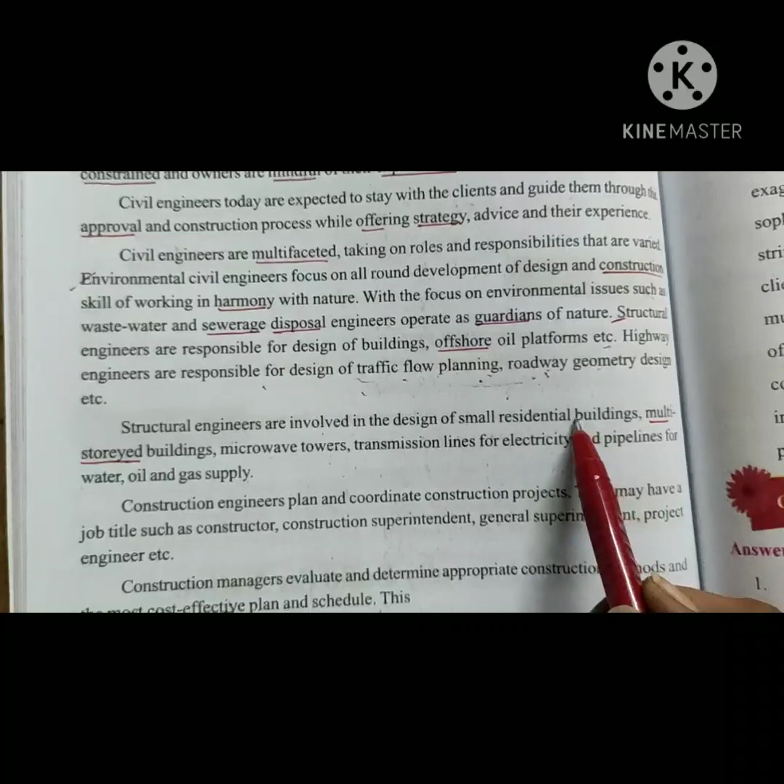Next, structural engineering. Structural engineers are responsible for designing buildings, offshore oil platforms, etc. They are involved in the design of small residential buildings and multi-storied buildings.

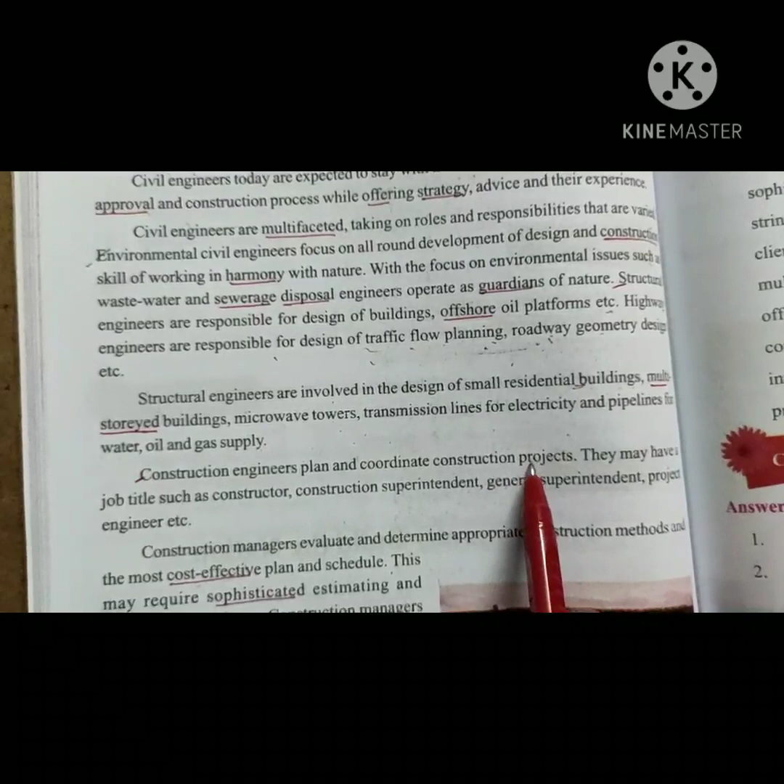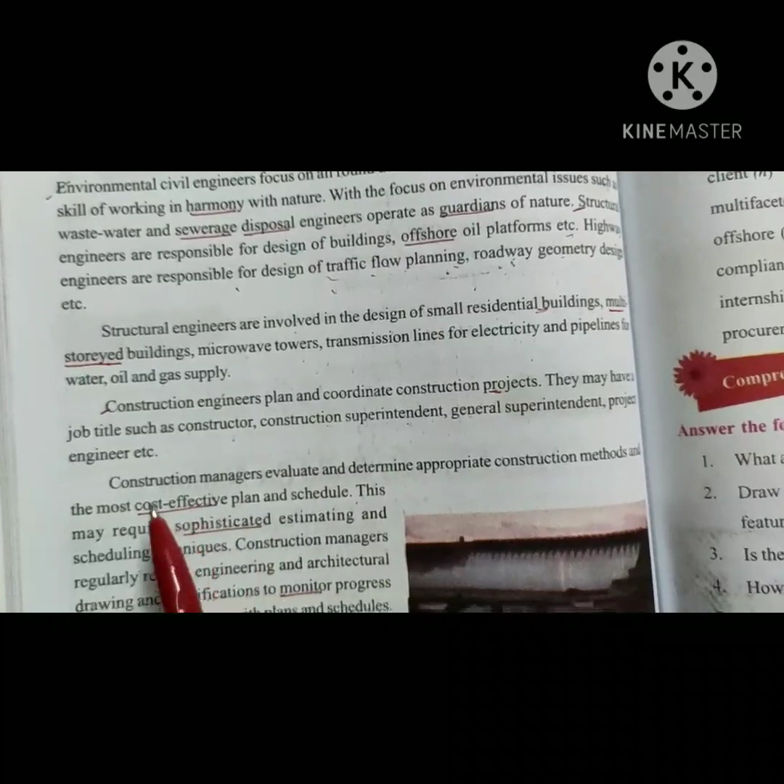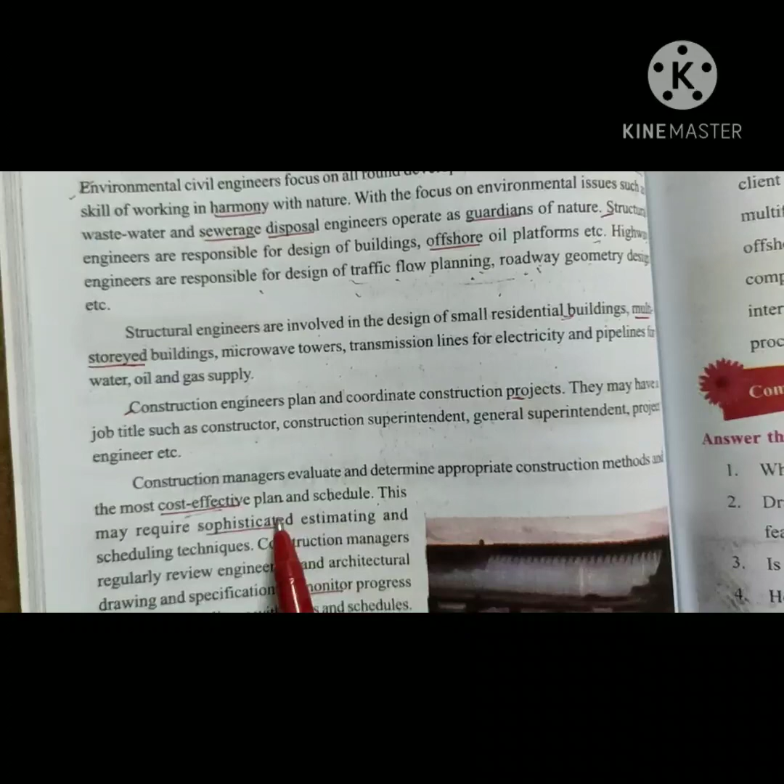Construction engineers help us construct projects. They are also called constructor, construction superintendent, general superintendent, project engineer, etc. Construction managers take an effective plan and schedule, giving us cost effectiveness and profit, using sophisticated and advanced estimating techniques.

It would be advisable for students to undergo practical industry experience through internships, cooperative education programs, or work experience in the industry. Undergo means to have; internship means training to gain practical experience. The student should have this practical experience.

You should have research and knowledge about practical industry experience through internships, cooperative educational programs, or work experience, or you have to have educational programs to get work experience in the industry.

Another key discipline is quantity surveying. Technical skills acquired in areas of estimating, costing, and specification, together with good knowledge of various procurement routes, tendering procedures, and contracting essentials, make quantity surveyors an inseparable part of the construction industry.

You should also know the quantity, how much should be used and surveyed. Technical skills must be acquired in various areas - you should know how much to estimate, the costing, and specification, together with good knowledge of various procurement.

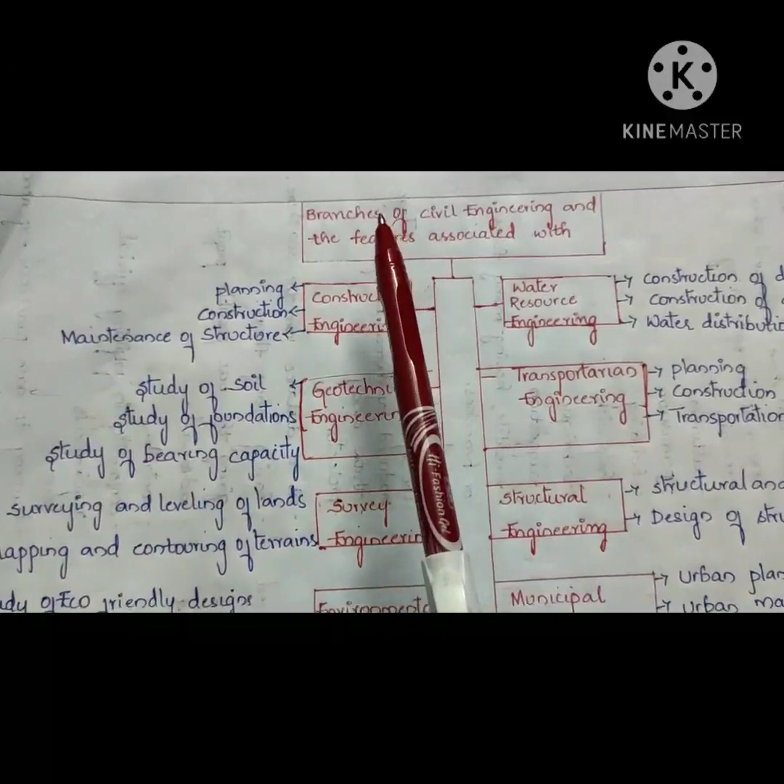In construction engineering, it includes the planning, construction, and maintenance of structures, and how to construct and maintain them.

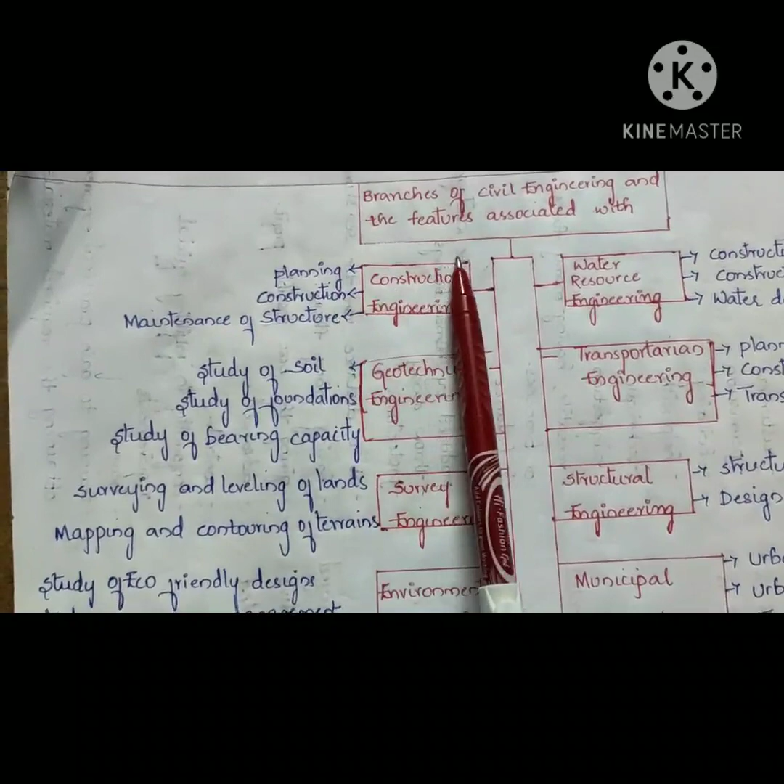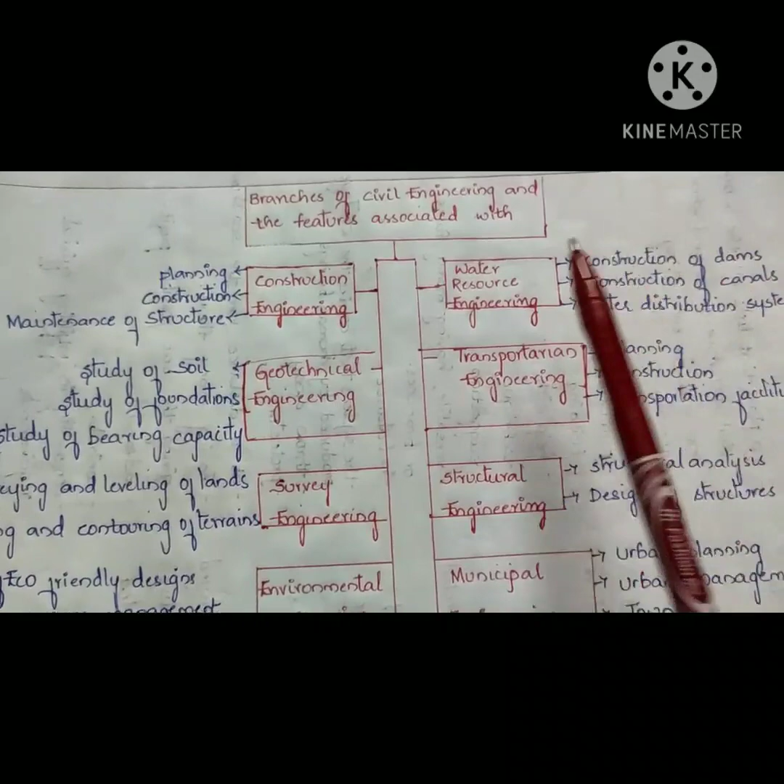Coming to water resource engineering: construction of dams, construction of canals, construction of water distribution systems. So in the water resource engineering branch, you'd be having construction of dams, canals, and water distribution systems.

Coming to geotechnical engineering: study of soil, study of foundations, study of bearing capacity regarding the soil.

Coming to transportation engineering: planning, construction, and transportation facilities.

Coming to survey engineering: surveying and leveling of lands, mapping and contouring of terrains. Coming to structural engineering: structural analysis and design of structures.

Environmental engineering, already we have discussed, no? Yes, it is the study of eco-friendly designs, study of sewage management, study of pollution and its treatment.

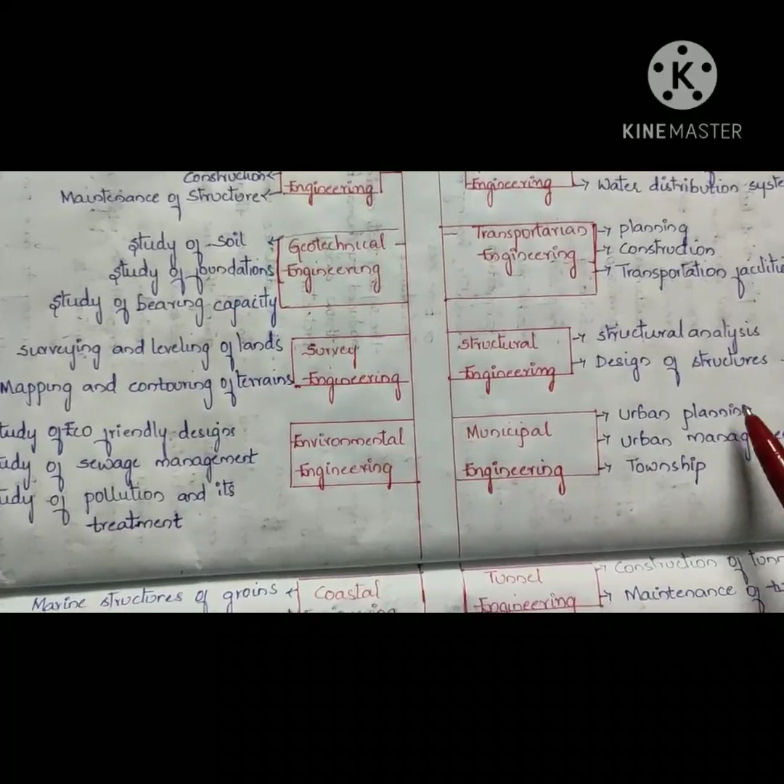Municipal engineering: urban planning, urban management, township. Coming to coastal engineering: marine structures of groins, marine structures of embankments.

Tunnel engineering: construction of tunnels, maintenance of tunnels. Earthquake engineering: study of seismic forces, study of earthquake resistant structures. Material engineering: study of material strength, materials of construction.

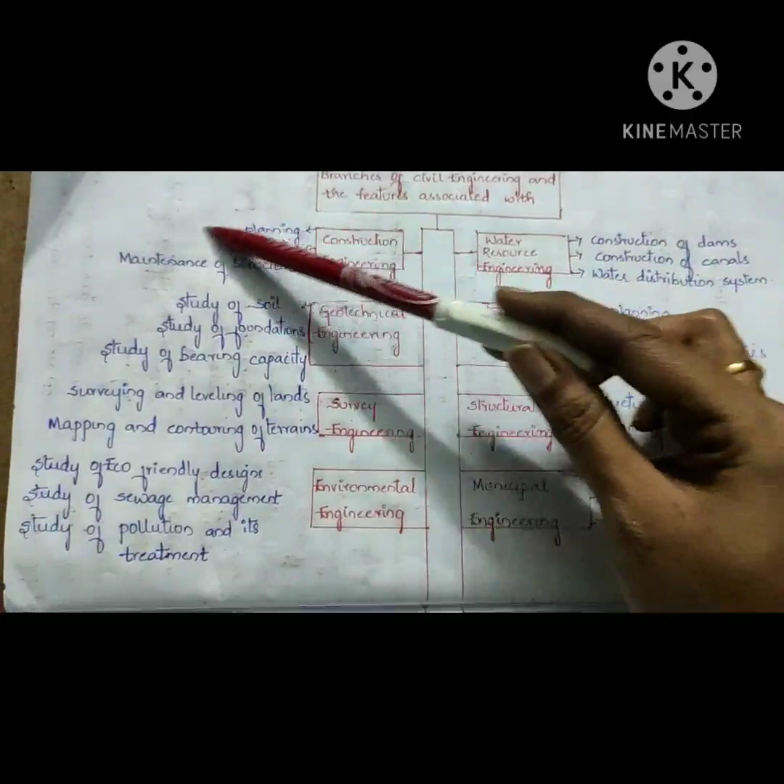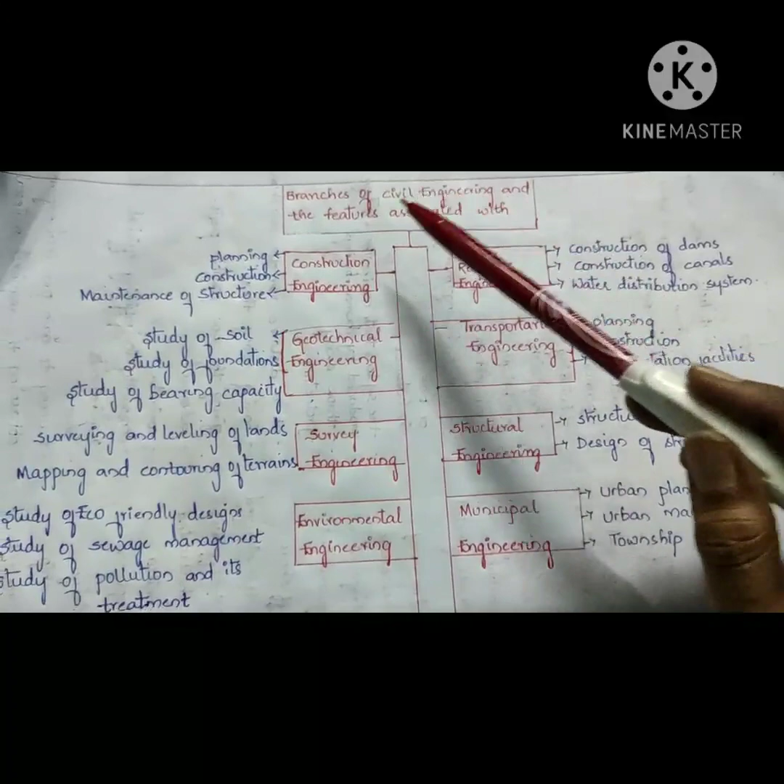So my dear children, coming to the 8th class itself, you have been totally confused about this engineering. First of all, what are the branches given in the textbook? Let us have a description, let us know about them. So these are the various branches which are in civil engineering.

Once again, let us go through the glossary. Disciplines: the subjects of study. Meaning of design: plan. Construction: to build. Meaning of manage: to be able to organize. Meaning of infrastructure: basic systems that are necessary for a country for smooth running.

Examples of infrastructure: buildings, transport, water and power supplies. Meaning of tunnels: ways built underground. Meaning of exaggeration: an overstatement. Meaning of state: say. Meaning of contribution: part.

Meaning of crank out: produce a lot of low quality things quickly. Meaning of sophisticated: advanced and complicated in the way they work. Meaning of landscape: everything you can see in an area when you look at it. Meaning of regulations: rules. Requirements: needs. Stringent: strict. Meaning of numerous: many.

Constraint: a thing that limits something. Meaning of mindful: knowing, aware. Meaning of expenditure: expenses. Meaning of schedule: a plan that lists all the work that you have to do and when you must do each thing.

Meaning of stay: remain. Meaning of clients: customers. Meaning of approval: permission. Construction: building. Offer: help with. Strategy: technique. Advice: suggestion. Multifaceted: versatile, having many faces or branches.

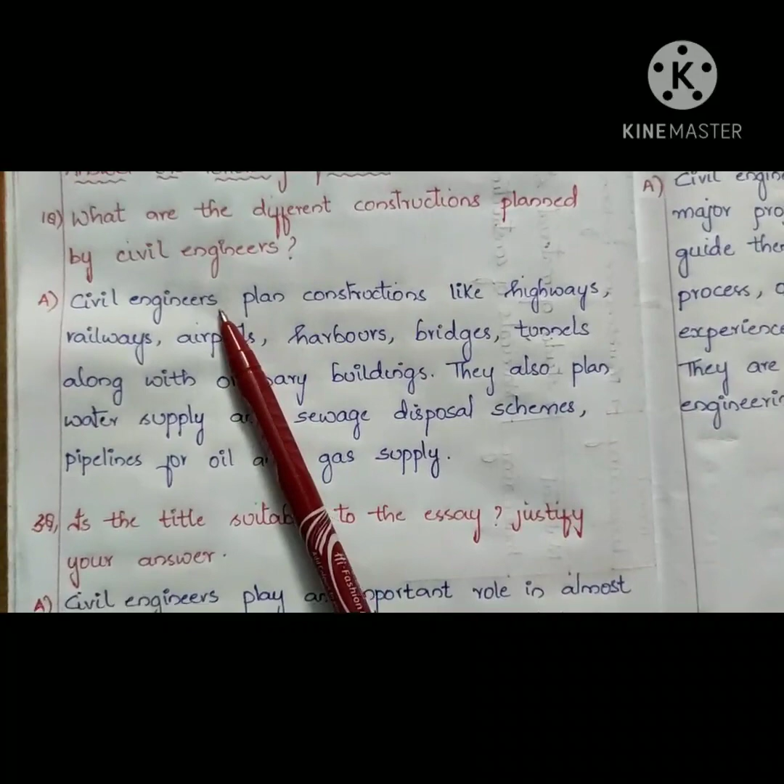Let us discuss some few question answers. What are the different constructions planned by civil engineers? Civil engineers plan constructions like highways, railways, airports, harbors, bridges, tunnels, along with ordinary buildings. They also plan water supply and sewage disposal schemes, and pipelines for oil and gas supply.

Second question: is the title suitable to the essay? Justify your answer. Yes, civil engineers play an important role in almost every construction. So what are the constructions? Let us give some few examples: airports, harbors, highways, infrastructure, bridges, tunnels.

They are responsible for the design of pipelines for oil and gas supply. So the title, 'They Literally Build the Nation,' is very much suitable to the essay because they are, who are they here, children? Yes, civil engineers. They literally build the nation.

They develop the nation. Next question: how do civil engineers guide the clients? Civil engineers stay with the clients and guide them in getting approval and in the construction process. They offer strategy, advice, and their experience in constructing the project successfully, making the project a success.

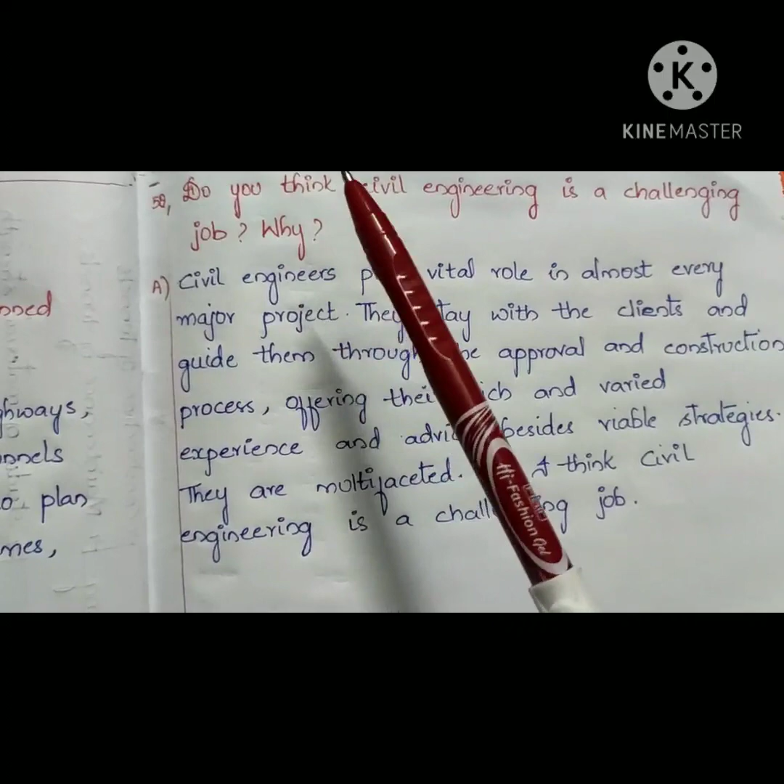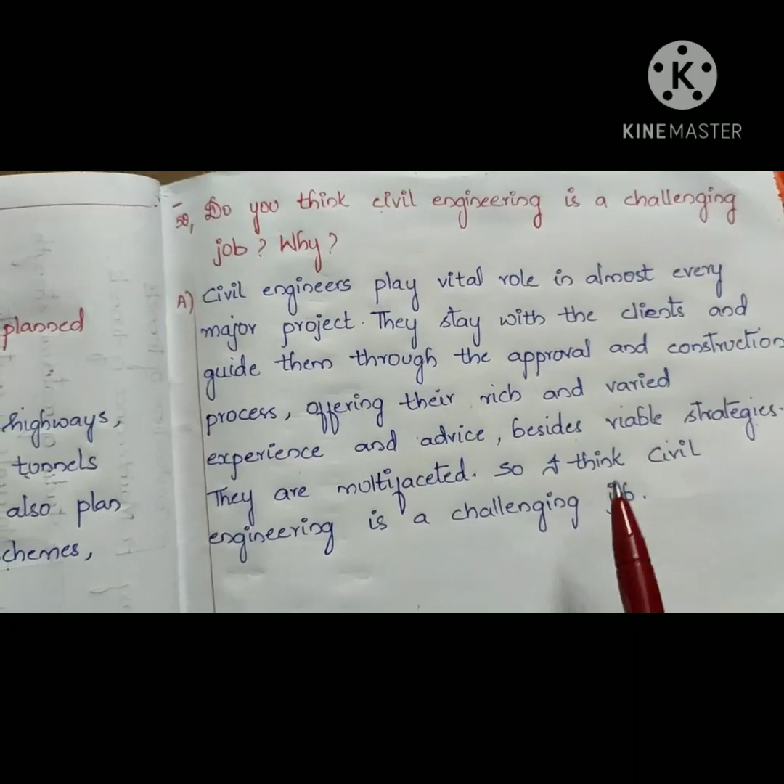Coming to the last question: do you think civil engineering is a challenging job? Why? Yes, it is. Civil engineering plays a vital role in almost every major project. They stay with the clients and guide them through the approval and construction process, offering their rich and varied experience and advice besides viable strategies. They are multifaceted. So I think civil engineering is a challenging job, and it plays a very important role in major projects.